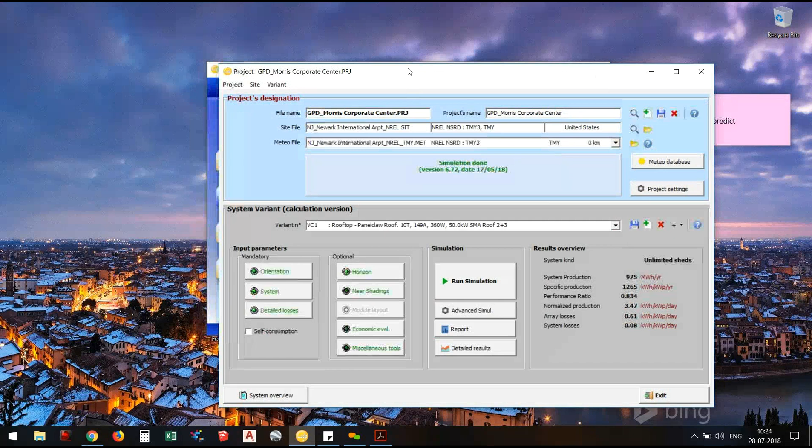So let's just go into project design. These are all the options we have, and we're going to use grid connected for now, right? Before using this window, I would like to show you the project that we are going to simulate, and a few steps that we take outside of PVsyst before coming to this window. So this is the project I'm going to use here. This is a rooftop system located in New Jersey, USA. I'm using a 360 watt module here, the tilt is 10 degrees, and you can see all of the details.

Azimuth is 186 degrees, and the pitch, the distance between each row, is 56 inches, and you have the address and everything here, right? And the interconnection is at 480 volts. So this is how a typical sales layout is going to look. We haven't started construction on this. We are still in the sales phase; we haven't sold this project. This is what we did with the satellite image we had. And you can see all other details here, module quantity, system size.

So if you look at any layout that the team has for which they want to generate a PVsyst report, these are all the details you're going to have: tilt angle, azimuth, module used, number of modules, and things like that. And then I'm using an SMA inverter here. This is the project for which we're going to generate a PVsyst report. So the very first step, as I mentioned, is choosing which meteo station, which meteo data to use, right? First, I'm going to tell you what I usually do for projects in the US.

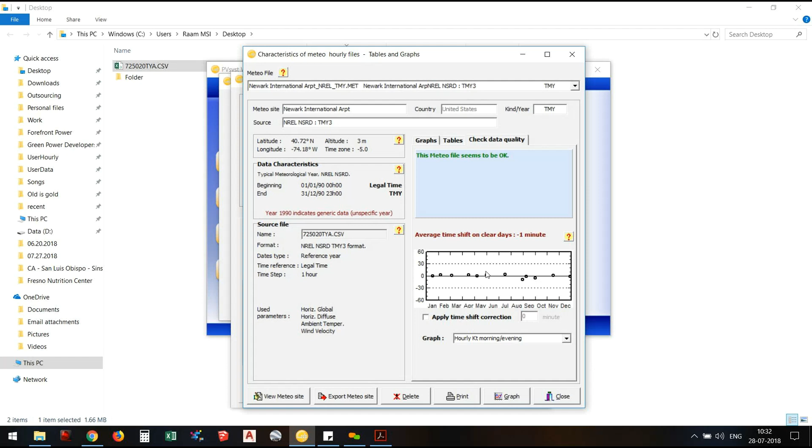So what happens is you would see a lot of spikes. Lot of days in a year where the insolation goes above 1000 watts per meter square. So it's a very bright thing. So what happens is PVsyst might consider that is not very right, and then it gives you an error saying that sunlight is abnormally high. Is that normal for the site, right? Something like that. So you could use this, but we're not going to do anything with this one now. So I'm just going to close it, and then once you have imported, I'm going to click Save Site.

You could see once I imported the file, it says meteo station met file created, right? So I've imported NREL data inside, so my meteo file is created, and then you have to associate this meteo with a site, right? We haven't done that yet. So I'm just going to click on Save Site. I'm just going to use the same name, and then I'm just going to click. It takes a while. Should happen. Okay, done now.

I'm just going to close this window, exit this window, and then come back to this window, right? So we are here, and we have a PDF which has all the details of the system, and we also imported the meteo station that we are going to use for the project. So at this page, I already have a sample project here. There are a couple of things, for example, module data and inverter data and all those things. If I'm generating a report for the same customer, I'm just going to use the same data from here and then recreate it, right? So it saves a lot of time.

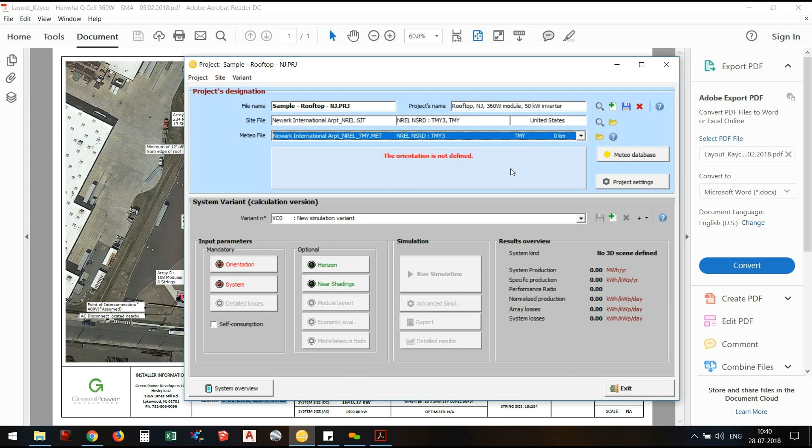Once I click on save, I get an error saying that orientation is not defined. Within PVsyst, when you see something in red, it means a problem. When you see something in orange, there is a problem, but you can ignore it. When it's in green, you're good. So we see something in red which says orientation is not defined. So what does it mean?

Orientation is how you define how your modules look, how the racking system is defined. You have a couple of different options here: fixed tilt, several orientations, seasonal tilt adjustments, unlimited sheds, unlimited sun shields. These are all for fixed systems. Then you have options for single axis trackers, and options for dual axis trackers.

So let's look at this rooftop system project. We see here that the tilt is 10.4 degrees and the azimuth is 186 degrees. It's a fixed tilt system facing south, with a tilt of 10 degrees, and this is the pitch I have. So I go into PVsyst, and you have an option here that says fixed tilted plane. So what is this fixed tilted plane?

It means that you have one row of modules. Let's say you're looking at a carport system where you have only one row of modules. Let me open a PDF to show what I mean. So this is a carport system, and I have only one row of modules here. The tilt is 7 degrees, the azimuth is 233 degrees, and there is no second row which is going to shade this.

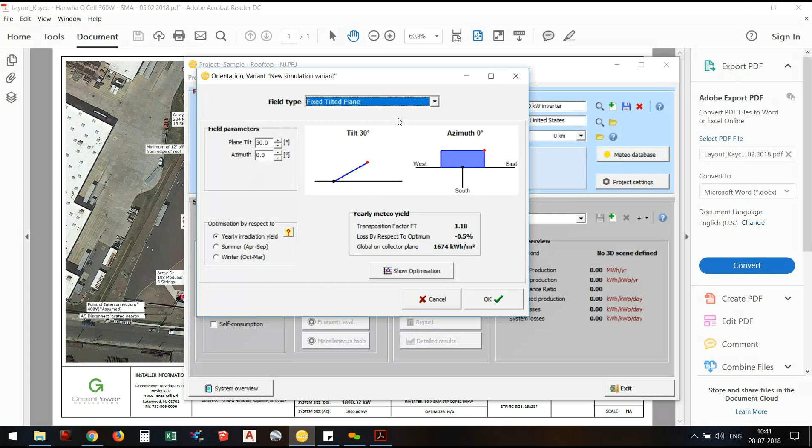When you use the fixed tilted option within PVsyst, you don't have the option to define the space between rows. So if your first row of modules is going to shade your second row, you won't be able to define that. So what I'm going to do is use the unlimited sheds option.

In this option, as in the picture here, you can see there are multiple rows, and this line shows how the sunlight is going to be. If you move this, it means that only after the sun reaches this point is this part of the module going to see any sunlight. Until then, for example, the sun is here, it hits like this, and this part of the module is going to be shaded.

So what we're going to do is we're not going to use this graphic here and then change the tilt. Instead, we're going to use the input windows here and then change the tilt. I know my tilt of the racking is 10.4, so I'm going to go and use that here, right? And then I'm going to use azimuth.

So you see when I enter 10.4, it rounded it off to 10 because PVsyst, at least for the tilt angle, it doesn't take decimal values. If it's say 10.5, it's going to be 10. If it's going to be 10.6, it's going to be 11.

So, and you would have seen some projects where they would have multiple PVsyst. One for a tilt of 10 degree, one for a tilt of 11 degree, one for a tilt of 12 degree. But at least in my experience, what I've seen is you don't see a lot of difference in generation between 10 and 11 degrees, right?

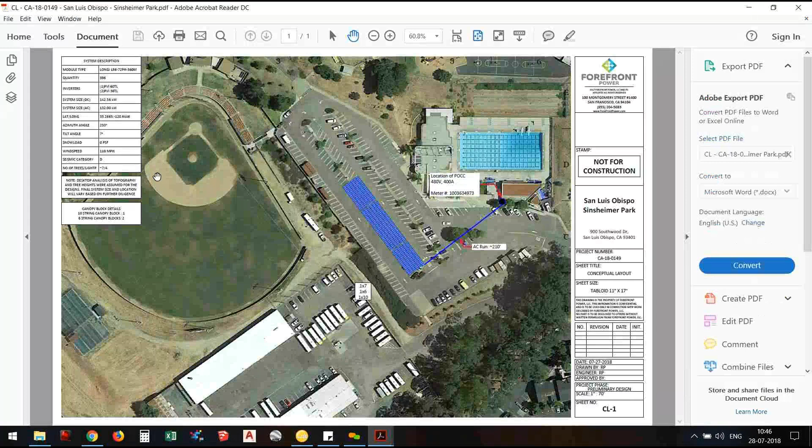And then I showed you a different project where we have a canopy system, and then the azimuth is actually 233 degree. So what happens is the azimuth for this project in PVsyst would be 53. 233 minus 180 is 53. So we enter that value.

If you have any questions regarding this as to why we do that, let's catch up in the question session and then go through it. So for now, let's just assume that you have an azimuth of 6 degree, and we're going to enter that here.

And then we have number of sheds. Number of sheds means number of rows of modules you have. When you have more than 2 rows, obviously the rows are going to get shaded, and then you're going to have some inter-row shading. But here we have more than 3 rows, and up until 100 sheds, PVsyst is going to tell you this is how the shading loss is going to vary.

For example, if you have like 50 sheds, I'm going to click on the shading graph. You can look at the show optimization graph. It says the shading loss is 0.4%, right? I'm going to bring this down to say 10, and then I'm going to click on show optimization. It doesn't change, right? I'm going to move this to 100.

It doesn't change. So let's say you have only 2 rows now, it changes, because when you have just 2 rows, the very first row doesn't see any inter-row shading. The second row is the one that is going to see inter-row shading, right? So the shading loss is actually cut into half, so you have only 0.2%.

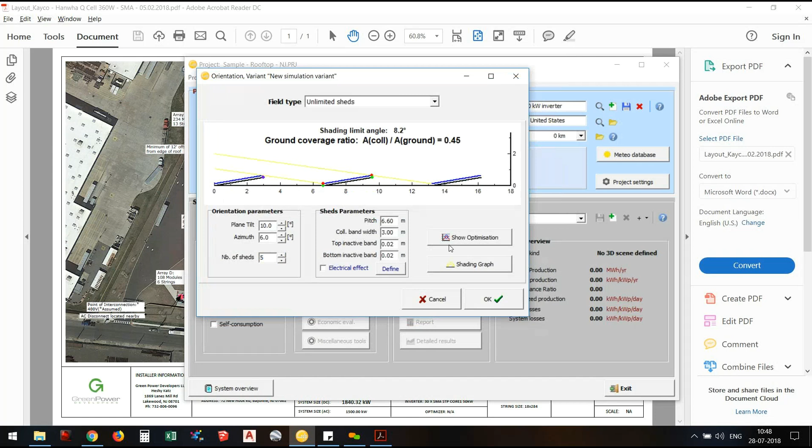Let's assume you have like 3 sheds, 0.3. I think up until 5 or 6, you're going to see 0.3, and then it just goes on to 0.4. But what I know is, it's more than 10. If you have enough time, you could just go count it. But for now, I'm just gonna enter 100.

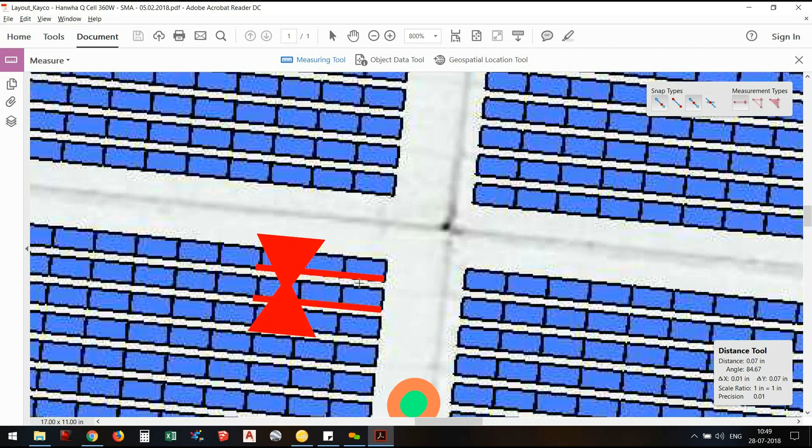Okay. And then there is something called pitch. Pitch is actually the distance from this point to this point. Let me see. Okay. So for example, this is the starting point of my module here, and this is the starting point of the second row. So the distance between these two is the pitch. The one you see between these two is actually the gap, which we don't really use in PVsyst. Some layouts mention gap, some layouts mention pitch. Just make sure that you're looking at the right number and then enter that.

So in this layout of mine, I've actually entered what the pitch is. It is 56 inches. And mostly this is defined by the racking solution you use. I've used Panel Claw as my racking solution here, and they have a fixed pitch of 56 inches. So we cannot go and change that. Whereas in a ground mount system where the very first row is not connected to the second row, you can define it whatever you want. In the field you can design with whatever pitch you have, and then just bring that number into PVsyst.

So PVsyst has all the values in meters. You cannot convert the units into inches or feet or anything like that. It will always be in meters. So I'm going to convert my pitch into meters now. So that's 56 inches, and each inch is 2.54 centimeters. So this will be my pitch in meters. It's going to be 1.42.

And then I have the collector bandwidth. Collector bandwidth is actually the length of this whole module here, right? In this system, my single module is just one, and I have placed the module in landscape. So the width is 39.25 inches or 39 inches, right? Whereas in the other system, you have 6 modules here, and each module is 77 inches long. So this would be 77 times 6, times 2.54 divided by 100. So my collector bandwidth would be 11.73 if I'm doing this project, right?

But we're looking at the rooftop project where we just have one module, and I know the width of the module is 39 inches. If you have any spec sheet of the module, just take a look at it. Most 72 cell modules would be 77 inches long and 39 inches wide. So 39 inches times 2.54 is 99 centimeters. Divided by 100 is 0.99. So I'm going to enter the collector bandwidth as 0.99.

So I do this, and then you have a value that says top inactive band. What this means is, when I say the measurement of the module is 39 inches, I'm measuring including the aluminum frame or any frame that the module has, right? Usually the modules have a frame. Unless you go for completely frameless systems like say a Canadian Solar, you're going to have some frame. It may not be 2 or 3 inches long, but you still have some. So I'm going to define these values as 0.02, and it's the same throughout. So I do both, and then I'm just going to click on OK.

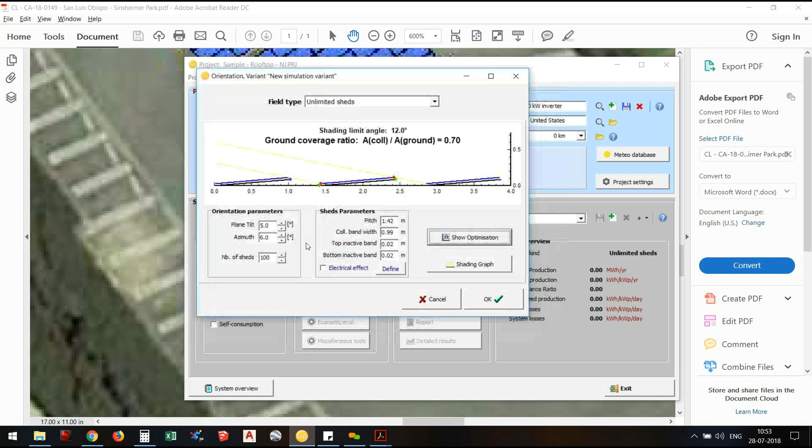And then if my tilt was, say, 5 degrees, the shading loss would be much lower. It's at 0.3%. So I'm just gonna keep it at 10 and have a shading loss of 1.2%. And then I'm gonna close.

So what we have done is we have imported the meteo station, and then we have defined how the modules are going to look: what tilt, what is the interrow spacing, and all those. And then we're gonna go to system. We're going to define the system size. We're going to choose the modules. We're going to choose the inverters. We're going to tell what is the number of modules we have in series, all the string details and everything, and then close this up.

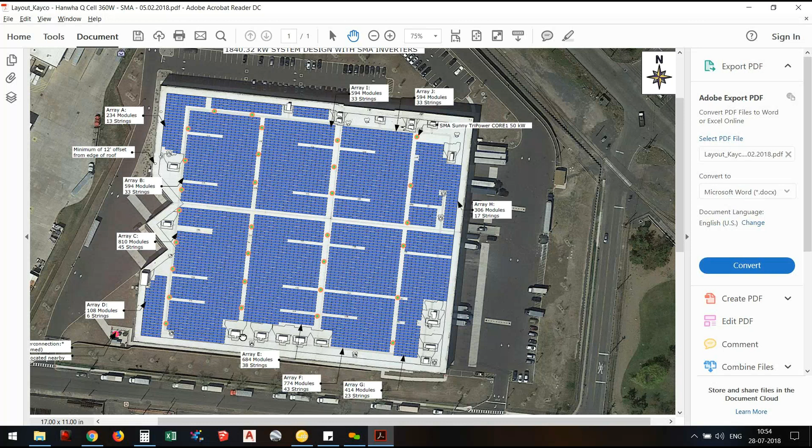So let's say you have more than one roof. Let's assume this system is actually divided into two, this part and this part. Let me just simulate this rooftop first, and then we'll take a system that's a little bit complicated. So you can name this one anything. I'm just going to say rooftop 1. For example, if you have a system where you're using 2 different modules, I would say rooftop 360 watt, and then I would define another system that says 370 watt, something like that. For now, I'm just gonna call it rooftop.

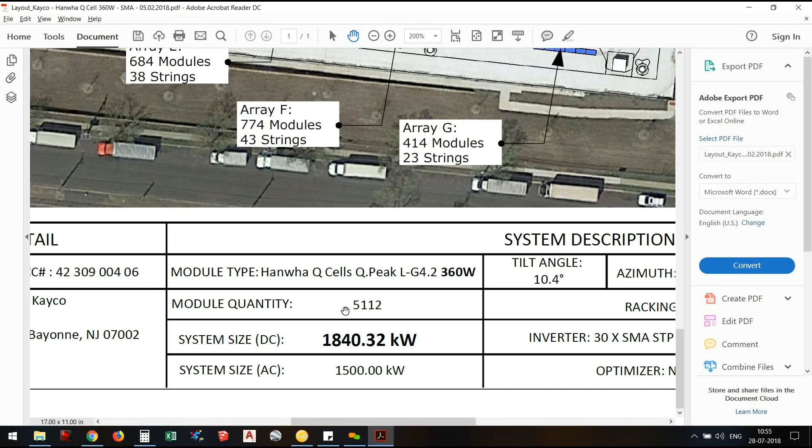And then I'm gonna enter planned power. Planned power is whatever the DC system size I see here. For me, it's 1.84 megawatt, so 1840.32. I've done that, and then this is where you choose the brand of the module. The module I have here is Hanwha 360 watt. So I just go here, use the drop down box, and then choose Hanwha.

Okay, so I have this. I'm going to choose that, and it says 5112 modules, because it takes the system size that I've entered and the module wattage that I've entered, divides it, and tells you you need approximately 5,112 modules. Let's say I enter system size as 2 megawatt. 2000 divided by 360 gives us 5556. So this is the system size. We entered that. We've chosen what module we're going to use.

There are some things that we don't want to cover in this call because we would like to get through the basics. But if you want to see the properties of the module, just click open here. It opens up all the details: short circuit current, maximum current, VOC, VMP, wattage, tolerance, type of cell, efficiency, temperature loss, size, model parameters, commercial, graphs, and everything. This is why I always suggest that you get the PAN file from the manufacturer. Once you do that, you don't have to worry about all these details.

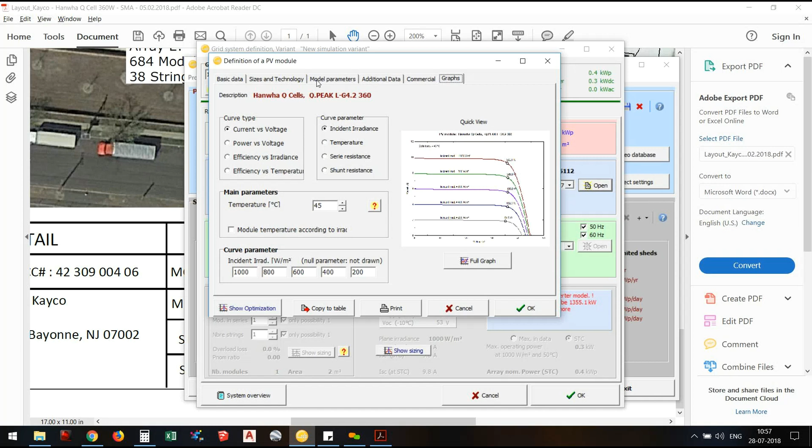If you get any of these details wrong, for example shunt resistance or series resistance, your module may not perform. You're not going to predict the module properly. So let's not do that. Let's try to get the PAN files from the manufacturer. So we have chosen the module here. Now we'll go and choose the inverter. So I'm gonna go here and then choose.

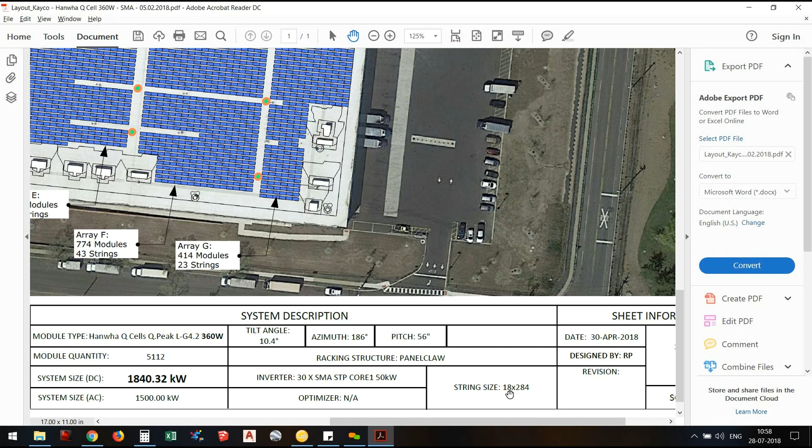So I have my inverter here, SMA 50 kilowatt, and I've chosen that. You could see the option here says use multi-MPPT feature. We're going to use the multi-MPPT feature, but not for this project. I have all my modules facing the same direction, and all my string sizes are the same. I have 18 module strings for the entire project. So it doesn't matter if my inverter has multi-MPPT or not.

Let's say, for example, there are a few conditions. Let's say I have some modules here which are going to be more lightly shaded than some modules over here. If these modules are feeding one MPPT, they might be better because they don't bring down the performance of the entire inverter.

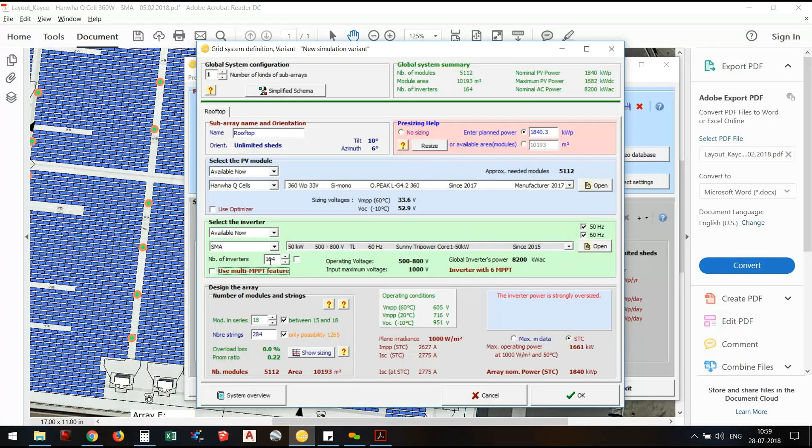But for the sake of simplicity, I'm not gonna do that now, right? So I'm just gonna uncheck this option. If you uncheck that option, you could see this value changes to number of inverters instead of number of MPPT inputs, right? So I'm gonna change this to 30 because that is what we have here. We have 30 inverters for the system, right? So I enter 30, and then it changes.

AC system size is 1.5 megawatt. DC system size is 1.84 megawatt. So once you do this section, it doesn't give me any error. So I come to this part, right? This one says modules in series, and then we have number of strings. So you could see this value varies from 15 to 18, right?

So I'm assuming you might all have done string sizing at some point, but let's look at one project. Let's do a simple math here. So as I mentioned, we are going to be using Newark International Airport for this project, right? So what I see here is, along with the other data, two different data: one is extreme low temperature, and the other one is 2% average dry bulb temperature, which is 34 degrees Celsius. So let's keep these two values in mind, and then do a little bit of math.

Okay, let me open a spreadsheet for this. So what does my minimum temperature say? It says minus 15 degrees Celsius, and then the maximum temperature is 34 degrees Celsius. And then we know that we are using a Hanwha 360 watt module. Okay, I'm gonna look at the spec sheet for now. So this is the spec sheet, right?

For example, you would have seen some systems where they say it's a 600 volt system, some would say it's a 1000 volt system, and some would say it's 1500 volt system, right? So initially all the PV module systems were 600 volt, then we moved from 600 to 1000, and now we are at 1500. So some modules are rated for 600, some for 1000, some even for 1500. And that detail should be there somewhere in the spec sheet. I'm not sure if this module is rated for 1500, so let's just assume that 1000 is the maximum we could do here.

Okay. And then I'm gonna bring in a few details from the spec sheet. So VOC for the 360 watt module is 47.71. And then VMP for the 360 watt module is 38.8, right? So this detail is from the spec sheet. This detail is from the site data. You can design a system anywhere, be it Chennai, be it in the US, be it in Japan. You always need to take these two values into account: minimum temperature and maximum temperature.

And then once you have taken these details, you're going to start looking at the temperature coefficients, right? So we are looking at VOC. The temperature coefficient is minus 0.28% per Kelvin. So this is percentage per Kelvin. Okay. So what we're going to do is find two voltages now: maximum voltage and minimum voltage. Maximum voltage is going to be based on VOC, right?

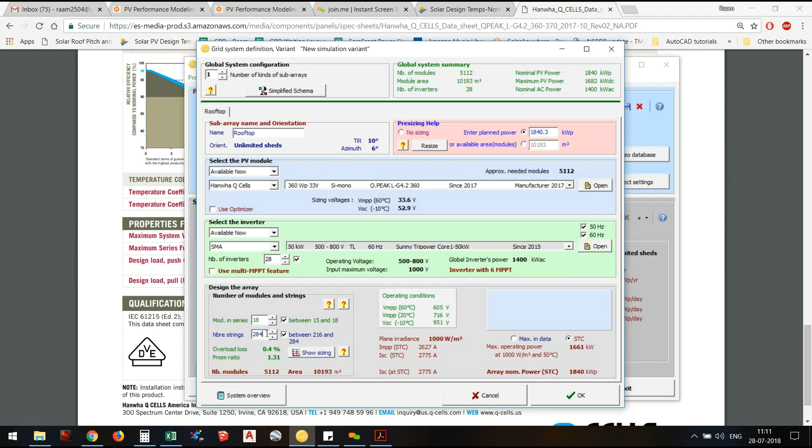360, 18, and then it says 284 because this is the number of strings that we're going to have. I'm going to go back to the design. So I have 5,112 modules, and each and every string is of 18 modules. I'm going to divide this number by 18, so it leaves me 284. So that means I have 284 strings in my system. I'm going to enter that here, 284.

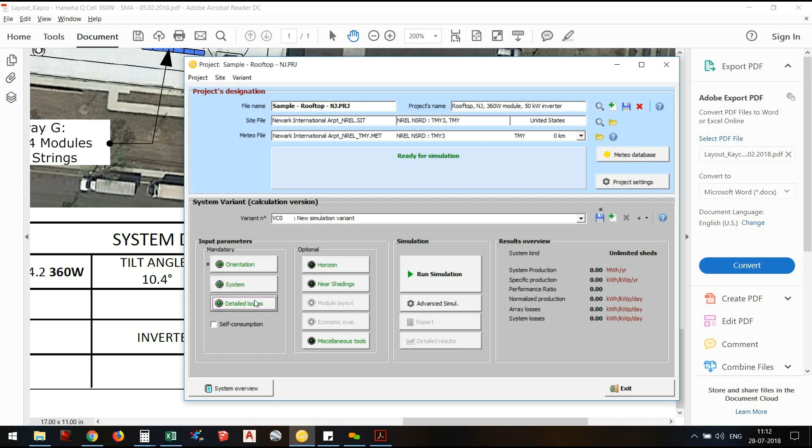So this thing is all done, right? I'm going to close this one. So we have defined orientation, where we say how the module looks like. And then in the system, we have defined the system size, module type, number of modules, then inverter type, strings, and all those details. So once we're done with that, we're just going to go to detail losses, where we define other detail losses.

This section is a bit important, but it involves a lot of input from our energy estimation team, because all the values you enter here are assumptions or studies that have been done in the field. So this is where we usually depend on companies like DNV. They come to our power plant, they take a look at every single detail: the modules that you have used, the wire length and all the voltage drop, and then they give you your ohmic loss, and that is what you use in PVsyst to generate a report.

But let's see what values we use, because we haven't built the system yet. We don't know if we are gonna win the project, but we're just doing an energy estimation report to understand how much the system generates, and we are gonna use some assumptions here. So you could see UC and UV values, right? UC is for heat loss from conduction, and UV is heat loss from convection.

So conduction is when you have something in contact. Let's say you have a pressure cooker at home. It's hot, so when you touch it, you feel the heat. You're in an AC room, you're feeling cold. You're not physically in contact with the air conditioner, but you're still feeling cold because the air around you is cold, and you're feeling the cold wind. That is convection.

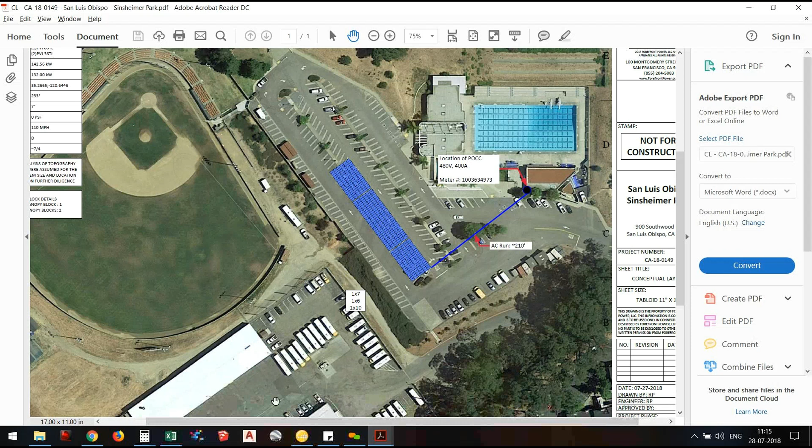Whereas in a rooftop system, we don't have that luxury, right? The tilt is just 10 degrees and the clearance is just 12 inches. So there is not enough area for the wind to move through the modules and take away all the heat. So in turn, you start losing a lot of energy due to temperature. So this one, the value you see is 20 and 0.

I haven't done the whole math, but the value I get from my design team is to use something like 20 and 1.2. So what this means is 20 is the factor by which I lose the heat through the material that is connected to the module. For example, I have an aluminum frame connected to the module that takes away a little bit of heat from the module. I might have, say, a fiber frame connected to it that might take a little bit of heat from the module. So it really depends on what type of frame you use and what study the design team has done before, right?

So I'm going to give 20. And then this value is 1.2, wind loss. So there is going to be a little bit of wind movement beneath the module, but it is not super high like you see in a ground mount or a carport system. So I'm just going to keep this at 1.2.

You would have seen some projects in residential scale. In residential projects, we don't have any gap between the modules. It is going to be flush onto the roof. So in those projects, you don't have any space for the air to move, so it doesn't take away any heat from the module. So in those cases, this loss factor might go down. It might be like 1.0, sometimes even 0.5.

Okay. So this value, it's an assumption. This value has to come from the design team, or at least people need to sit together and understand, okay, this is what we do, and this is how the whole process is done. So these are all the factors that usually independent engineers like DNV and Leidos define. They have people who sit in the field. They have different measuring methodologies. They might have more than 4 thermocouples on each and every module. They take data from that, study the data for the whole year, and then give us just 2 different values that we could use in our energy estimation.

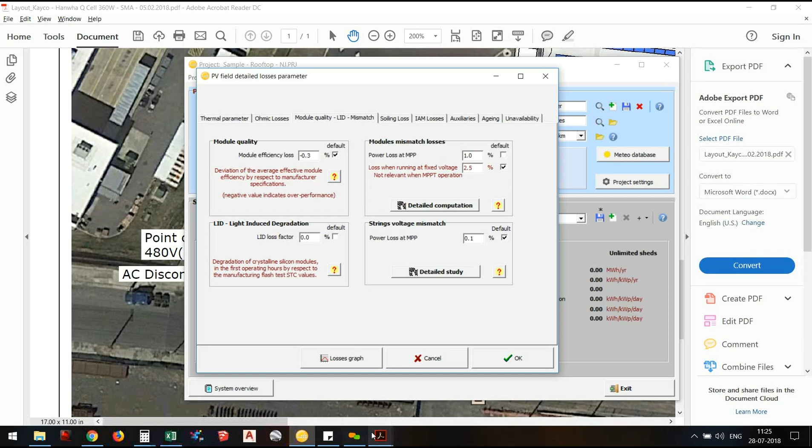So let's assume we're gonna use a transformer for this project. I'm gonna leave this one on, and then I'm gonna close this and go to the next tab, which is module quality data. Module quality, this is module efficiency loss. So what this means is, let's look at the spec sheet of the module. So what do they say here? You have all these data like power, 360 watt, 365, 370, and all those.

And then you have a detail which says power tolerance. So power tolerance is 5 watts to 0 watts. What this means is, even though the modules are all rated for 360 watt, not all of the modules are 360 watt. Some might be a 361, some might be a 358, some might be a 365. So, for recent times, you could see the number here. It says power tolerance is 5 watts to 0 watts.

But if you look at spec sheets from say 2001, 2002, you will see two different numbers here. You will see 5 watt and you will see 3 watt here. So what that means is, when you're buying a 100 watt module, it could be anywhere from 97 watt to 105 watts. And people were taking advantage of that. Instead of giving you a 100 watt module, since it's already stated that it could be anywhere between 97 to 105, they were sending all modules at like 97, 98, 99, but not 100, right?

So what happens is, you have a system based on the STC value. Let's say you have 10 modules and you have designed it saying that it's all 100 watt modules, so it should be a 1000 watt system, right? But all the modules we received were at 97 watt, right? And so the final system you have is not a 1000 watt system, but a 970 watt system. So obviously your system is going to generate much less than what you thought it would generate, right?

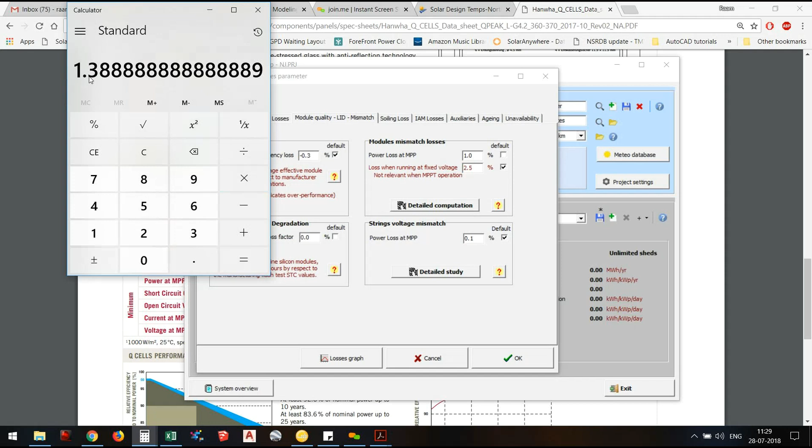So what does this mean? It means that you have a gain of 1.3%, right? So if you have something like that, I'm going to enter minus 1.38, because this one says module efficiency loss, but it is not actually loss, it is a gain, right? So I'm going to enter a negative, minus 1.3. But in reality, it is not the case, right?

We won't have all of the modules at 365 watts. Let's assume we're going to receive only 50% of the modules at 365 and the rest is all going to be at 360. So it's going to be like 0.7. I'm going to go and change this to 0.7. Okay. So this is an assumption.

But when you're going to go and install the system, you have received all of the modules from the manufacturer. You have the flash data, you have the module wattage data, so you know what the module wattage is. Let's say, for example, we have ordered 10 modules and values range from 361, 362, 360.

365. Okay, so what is my sum here? Right, so 361.4 is the average, and my spec sheet says 360, so I'm just going to divide it by 360, right? So 0.38%. So this is what I'm going to use here, minus 0.38, right? So this is how they do.

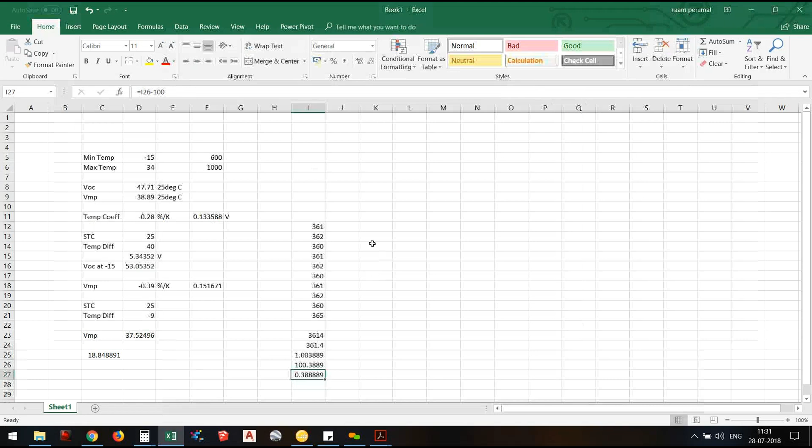But if you have like 10 modules, you can do this. But when you're going to order thousands and thousands of modules, we won't be able to do this. It has to be someone who does this for us and just gives us the flash data. So it's minus 0.3. And then LID loss. You would have come across this factor.

It's light induced degradation. So what happens is, the modules are manufactured. They are sent to the field. When they're exposed to light for the very first time, there is a little bit of degradation in the performance that you cannot claim back. It'll stay like that to the end.

For example, when you order a 400 watt module, you have like 1% LID loss. So what happens is it actually loses 4 watts on the field. So it would always stay as a 396 watt module. It doesn't stay as 400. So that loss, whatever you have in the spec sheet or whatever the manufacturer tells you, you enter that data here. So I'm just going to click on default.

But usually what happens is you talk to the manufacturer and try to get the values. The manufacturer gives you something like minus 1% or 2%, something like that. So I'm just going to click on default for now. But that detail has to come from the manufacturer.

These days we have a lot of manufacturers who try to make changes in the manufacturing process so that they don't really have any light induced degradation. There were a few companies which recently came out and said that they have LID proof modules, the modules that don't have any LID losses.

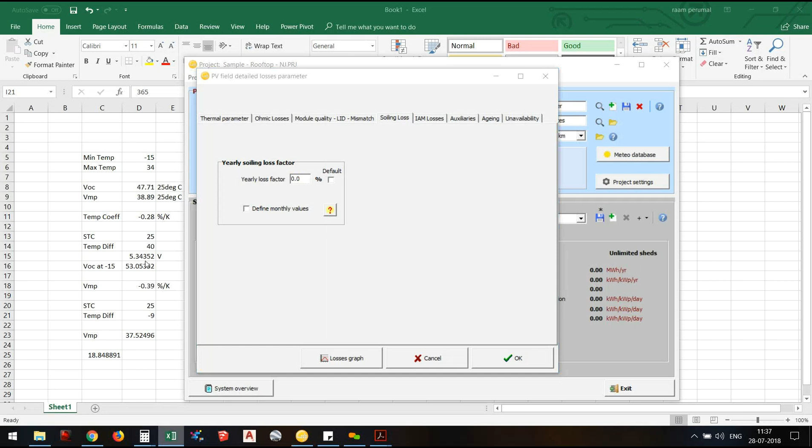I'm not sure if you had a similar one for the sites in India, but at least in the US, we worked with the independent engineers, and then we got a tool. So what I'm going to do is I'm going to enter the address. So I'm going to enter Newark, New Jersey. Right. I do that. It fixes the lat long elevation, and then I'm going to click on find closest station.

So I've done this. So what I'm going to do is I'm going to change the details here that say rooftop, and then set the detail 186 azimuth, and then I go to the next tier and click on run snow loss. Okay. So I get a value for the whole year, which is 8.6%, 9.1%, 4.8%. So it goes like this.

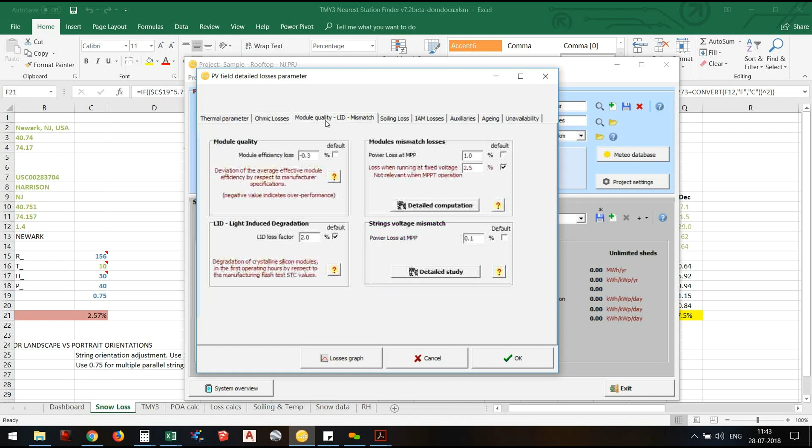So we have defined thermal parameter, ohmic losses, LID, mismatch losses, soiling losses, IAM. So I'm just gonna click on OK, and I'm not gonna talk about the horizon, near shading, or miscellaneous tools for now. I'm gonna go to run simulation. So we have defined the orientation, the system sizes, modules and things. We have said what are all the losses.

So now I'm gonna click on advanced simulation, right? I'm gonna go here and enter the details, simulation 1 or whatever it is. Let's say you're gonna look into multiple variants. At first you check with SMA inverters, second with, say, another inverter, third with a different central inverter. You use this tab here to enter those details so that you know what you're looking at. Sim 1, let's say SMA, and then I'm going to click on simulation.

So once I'm done with the simulation, this is the graph I have, and then you have an option here which says report. I'm going to click on report, so you get this final PDF report that we usually see as a PVsyst report, right? You can see it says version, date, grid connected system, and then rooftop, New Jersey, 360 watt. So whatever definition I gave at the top, I said that's a 360 watt module system.

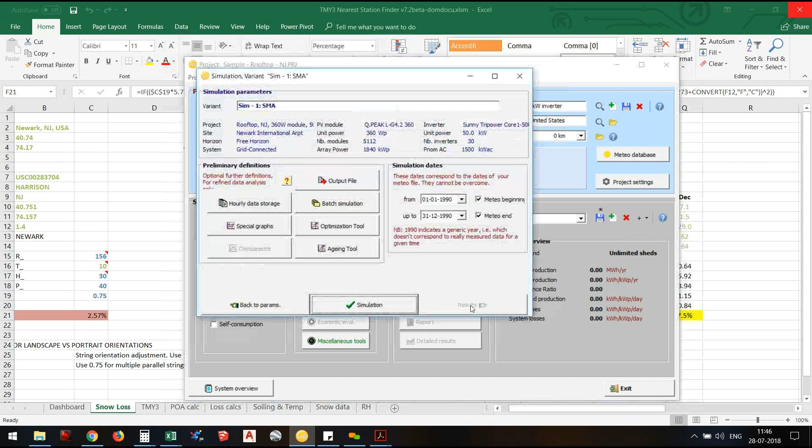And then same with inverter. Why am I seeing 28 units here? Because I think I didn't do a good job when defining the inverters. It should have been 30, but I'm seeing 28 here. So actually I've missed entering 2. So what I'm going to do is I'm just going to close this one, click on this back button, go to system, and then go and change the number of inverters. Okay. So I've done that. I'm going to click OK, and then come to advanced simulation and click on simulation again.

So in the first page, you wouldn't see it. The first page is just to make sure that the report has all of the values that you entered. So same with page 2 as well. And then the third page is where you start seeing the simulation values, right? So you have all these details here, and then you have a number that says produced energy. So this produced energy means how much energy you generated in this year, and then you have the specific yield, which is like 1246 kilowatt hours per kilowatt peak, and then you have the performance ratio.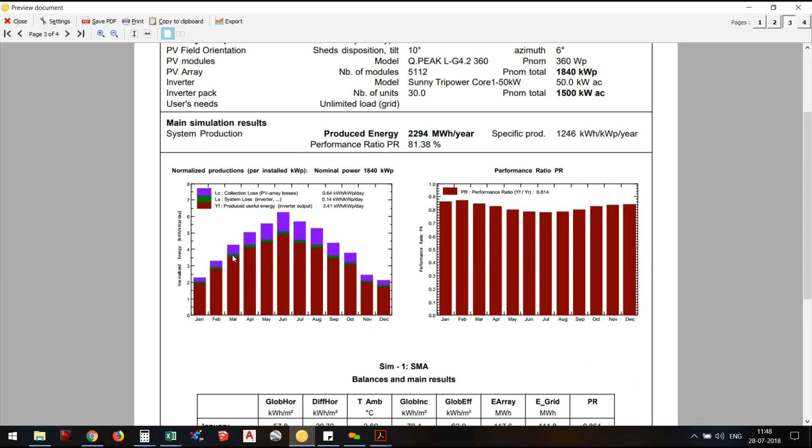And then you have this graph, which is very common. You guys would have seen it. Right? So you have this graph which says Yf, this is the produced energy, these are all the losses, and these are all the system losses. And then you have a table which has GHI, DHI, ambient temperature, global incident, global effective, and E array. So E array is the energy that you produce in the PV module, right? Whatever energy is generated on the module side. And then E grid is something that is fed to the grid. So you see a difference between this value and this value, right? That's the loss you actually have in the AC side of the system. And we'll get to the next page where we have this graph and I'll explain what everything here is.

So this 1422 kilowatt hours per meter square, this is what the insolation data is. So if you're looking at a site somewhere in India, this one would be around like 2000, 2200 because we have a lot of sunlight. And this is horizontal global irradiation, and this is global incident on the collector plane. So this means the energy that you actually collect on the PV surface, right? We have kept it at a tilt of 10 degrees, right? So what happens is when you keep something flat on the floor, facing exactly at the sky, it doesn't collect any of the scattered beams.

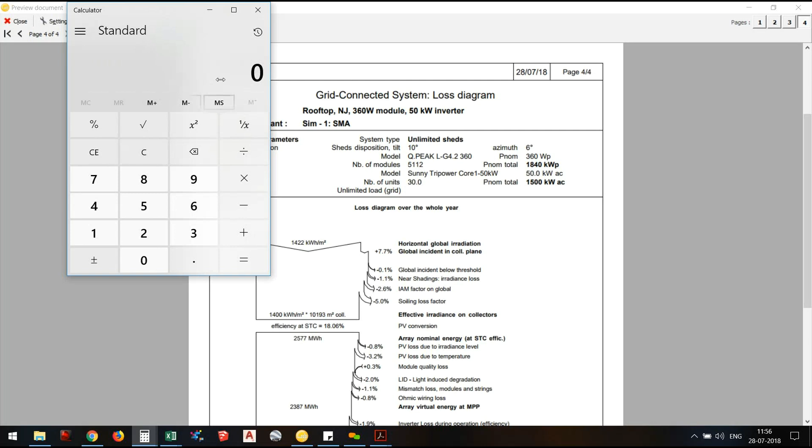I think this module has a different spec than what we have. So let's assume, I think it's 1.99. Okay, so this is the module area, right?

So what this means is, 10193 square meters is actually the collector area. Collector area means the area of each and every module times the total module count. So you have this, and then we know that the efficiency of the module is 18.06%. This efficiency comes from the PAN file.

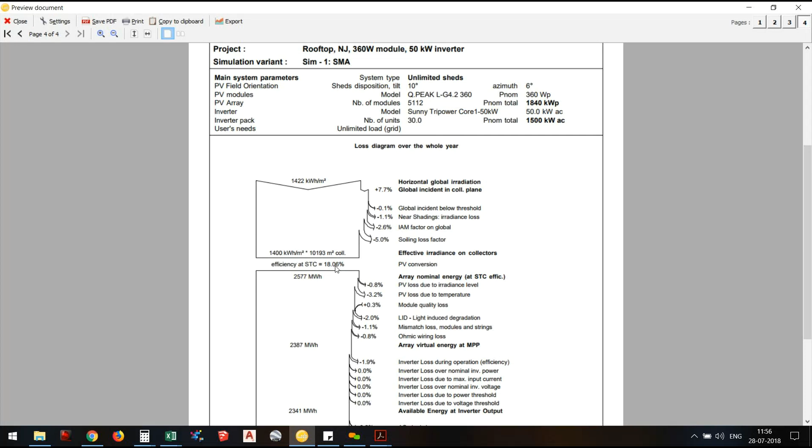If you have a spreadsheet, something like this, you can go and see the efficiency. It says 18.1, 18.3, 18.6. So we are using a 360 watt module, and the efficiency is 18.1, and that is what we see here. Right? So we have this value. Let me show you the calculation.

So we have 1400 kilowatt hours per square meter. The overall area is 10193, right? So this is the energy we have as sunlight, all the energy we have from the sun striking on the modules. But we know that the module's efficiency is only 18.06%. It has the capacity to convert only 18.06% of sunlight into electrical energy.

So you would divide this by 100, and then 2577 kilowatt hours. This is in megawatt hours, so you divide this by 1000. Right. You have 2577.19, and that's the number you see. So till here, it's all sunlight. We are doing all these losses in the sunlight spectrum. And here is where the energy is converted from light energy to electric energy, and this is where you have this one, 2577.

So all these losses you see here will be in the electric spectrum: irradiance loss, temperature loss, quality, and everything. So what does this one mean? PV loss due to irradiance level. As I mentioned, your module's efficiency is 18.06% only when the sunlight is 1000 watts per square meter of irradiance. When the incoming sunlight is not at 1000 watts per square meter, let's say at 800 or 600 watts per square meter, obviously you're going to have some loss, and this loss accounted over the year is 0.8%.

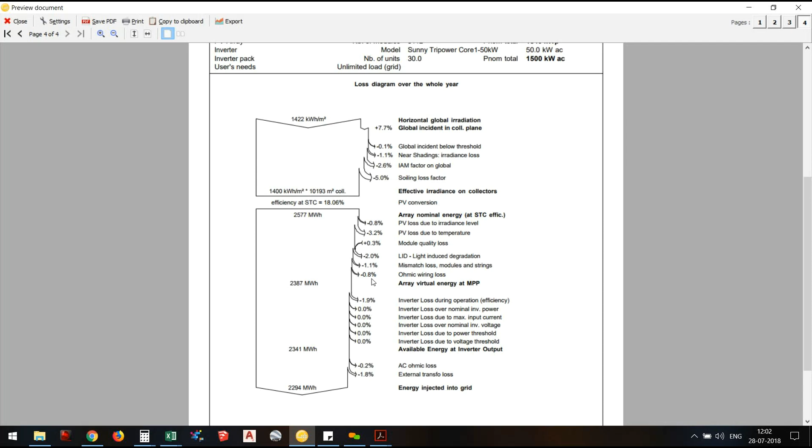1.5. That's because 1.5 is the maximum. But throughout the year, you're not going to see 1.5. There are some days where there is not going to be much voltage current traveling in the wire. So only when the wire reaches its maximum capacity, you're going to see some loss. If it doesn't do that, then we don't see any loss. Then it will be zero. So throughout the year, PVsyst averages the ohmic losses, and this is what the final loss will have.

And then you see inverter loss during operation, which is 1.9%. This is the loss. This is the efficiency of the inverter. The one that we used is 98% efficient, so we are seeing 1.9% loss here. But if you are using a central inverter that has the efficiency of say 95%, you would see a 5% loss. And then same with AC ohmic losses. So this is DC wiring loss and this is AC wiring loss. So we define 0.5%, but throughout the year the average is going to be much less, and that's what is 0.2%.

And then we have a transformer in the system. Obviously, the transformer has to convert the voltage from say 480 volt to 12.47 or 11 kV, 4.67 kV, whatever the case is. So obviously during that conversion, we are going to lose some energy because it's not 100% efficient, and that's why we see a 1.8% loss here. So you could see that we started at 2577 megawatt hours. We lost all this energy, and then we end up at 2294 megawatt hours. So this is the loss graph that we see in every single PVsyst report. And this number is what you see in this page, 2294 megawatt hours, and this is the specific production.

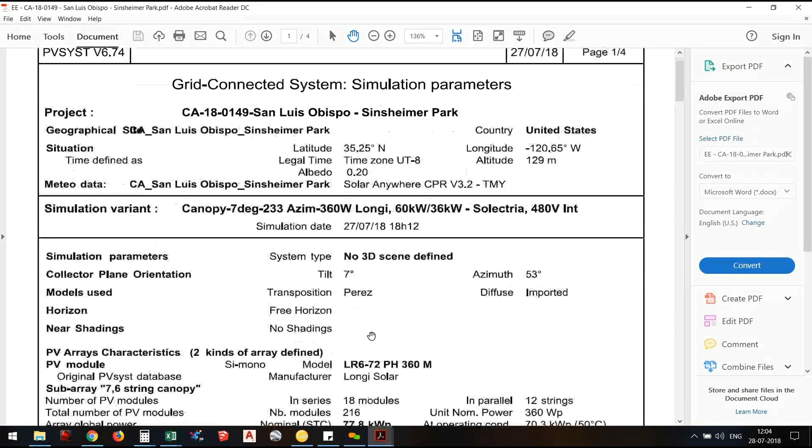So Ram, in a few of the PVsyst reports, there is a graph in yellow color. Yeah. Do you have a sample, or let me bring you one? Give me 1 second. I do not have one. I want to understand how to read it. I should have one. Yeah, give me 1 second. I think that is module layout. Ram, I think he's talking about the sun directions. Okay. Give me 1 second. Let's go back. Is this the one? Yeah.

Yes. Okay. So what this means is horizon. Let's assume you have a PV system that is right next to a mountain. You have a mountain range. It doesn't have to be right next to it. It could be even 100 kilometers away. But what happens is, unless and until the sun comes above this, your module is not going to see any sunlight, right? It's only going to get scattered rays. It's not going to give you a direct beam. Let me draw one.

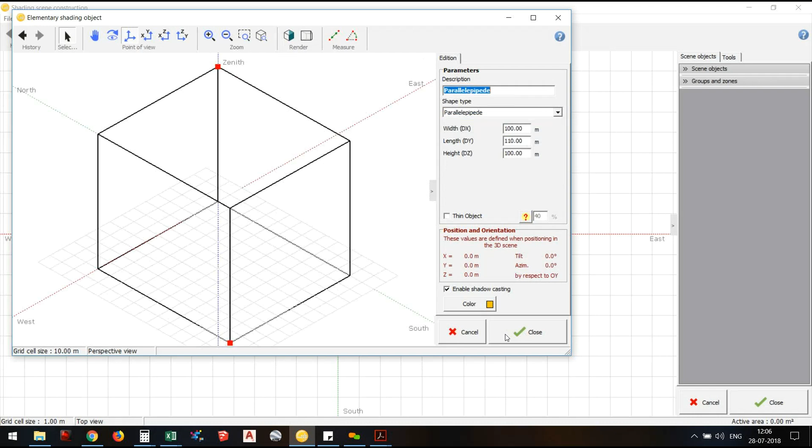Hold on 1 second. Okay. Let me show you this. So what we're going to do is draw. You're going to generate a shading object. In PVsyst, you cannot go and draw a mountain or anything. So I'm just going to draw a regular parallelepiped, something like that. You make a structure. I mean to say the pole. Yeah, something like that. Okay. So let's assume this would be a mountain, and then we're gonna place modules here.

Okay. So I have a module here, right? Sayan, are you able to see the screen now? Yes. Okay. So let's assume this is the situation that we're talking about. We have a mountain range here. We have a PV module here. So the sun goes from east to west, right? So during the morning hours, until noon, the mountain is actually to the other side of the module, right? And here it is all clear. There is nothing blocking the module's view from the sun.

So you won't have any shading loss. But what happens is when you get here, the mountain is here, the module is here. If the sun is very high in the sky, you would not have any problem. But during the evening hours when the sun comes down, it will usually be very low. So direct sunlight would not hit the modules. It will always be scattered beams.

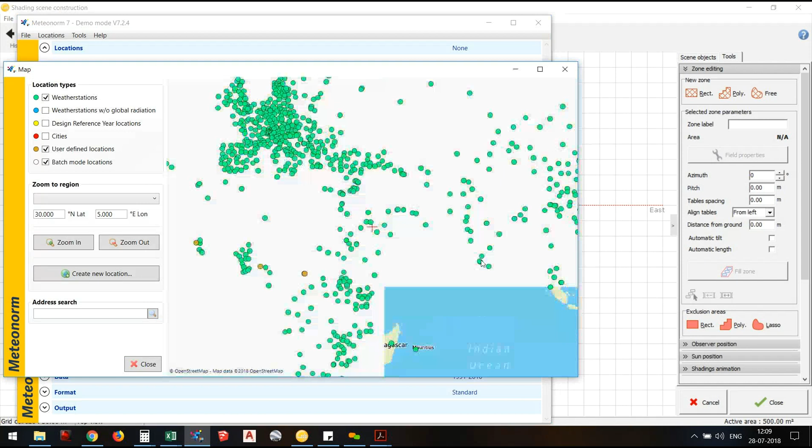So this is the tool. This is Meteonorm. Okay. In Meteonorm, you can use this particular tool for free. You can download the horizon for free. So I'm just going to click on this option, which gives me a map. I'm gonna go to Chennai. I'm gonna go here. I'm gonna click on this. It says Madras weather station, everything.

So what I'm gonna do is choose something like this. Let me see if we get a bit more granularity. I'm not sure. I'm just gonna put. Okay. So we are here, right?

So once I've located the site, I'm just gonna click on create new location. I do this, and then I save the name as Tambaram Chennai. Then I close this, come here, and load this site. Okay. So do you see this one? If we want, I'll go back and tell what we did within Meteonorm to get this one. But let's just look at this one.

Hold on 1 second. Okay. Can you guys hear me now? Yes. Okay. My earphone came off. So yeah.

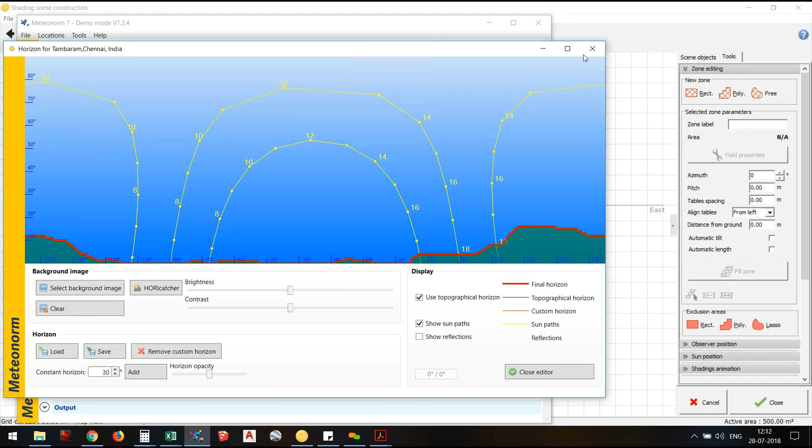I close this one. We close this one too. And then you see an option here which says horizon. I'm going to click on this, and click on read import data. Before importing the data, I'll show you what this means. You see a pendulum-type graph here. This is the path of the sun.

We might have seen some online pictures where a person takes a picture of the sun from the same spot throughout the year. You would see that it actually makes an 8 shape. It is what you see here. So this 8-type structure you see is the time of the year. And this inverted bell-shaped line which you see here actually corresponds to each and every month.

So what this means is the innermost one. This month is actually, I think it's March or June. Let me get you a better data. So this one corresponds to 1 month. This line corresponds to 1 month. This line corresponds to 1 month. Okay. So this is the default graph we have, and this is called azimuth and sun height. So it moves from 0 to 90 degrees as you see.

So what this means is, usually during sunset, sun goes down, right? It's 0 degree. At sunrise, it's at 0 degree. So during the day, sun rises up. It goes from east to west, that is azimuth angle, and then it goes from 0 degree to 90 degree, which is altitude angle. So the location of sun during any point of the day. Let me show you another graph which makes it very clear. This one. The image was the best one.

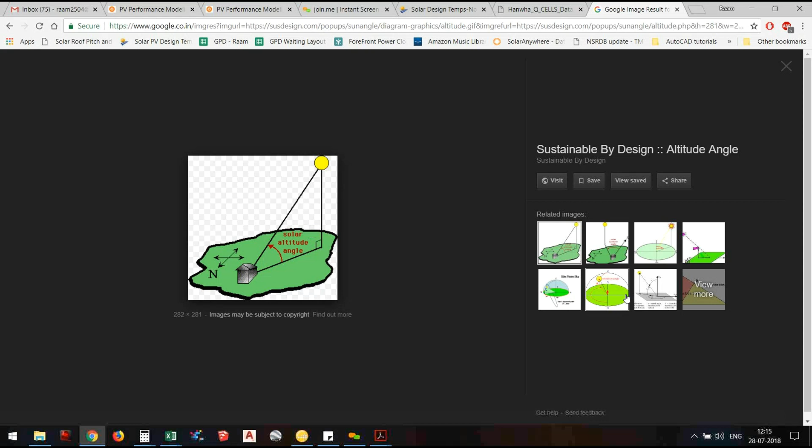And then there is another factor called the azimuth angle. So what this means is, if you're looking perfectly south from your house during the morning hours, sun is going to be at your left hand side, right? So if you want to see the sun, you have to turn completely left. Let's say you go out again and want to look at the sun at 10 o'clock. You don't have to look all the way. You have to just maybe turn 20 or 30 degrees from perfect south. So that angle the sun makes is called azimuth angle.

So if you want to define, because this is three-dimensional, right? Sun moves in a three-dimensional space. So if you want to define the location of the sun, you have to define it in two ways: what angle it makes with south and how high it is in the sky. How high it is in the sky is defined by altitude angle, and what angle it makes with south is defined by azimuth angle. So in PVsyst, this is defined for a site.

What we're going to do is bring the data that we downloaded from Meteonorm. When you click on this, it gives you different options: PVsyst internal file, Carnaval file, Solmetric Suneye, Horiz'on software, and Meteonorm software. Meteonorm software is what we use at the moment. I'm just going to click on that to bring this value in. Okay. So you see the value now. This one doesn't have a lot of value, so I'm just going to adjust this one. I'm going to pull it like this.

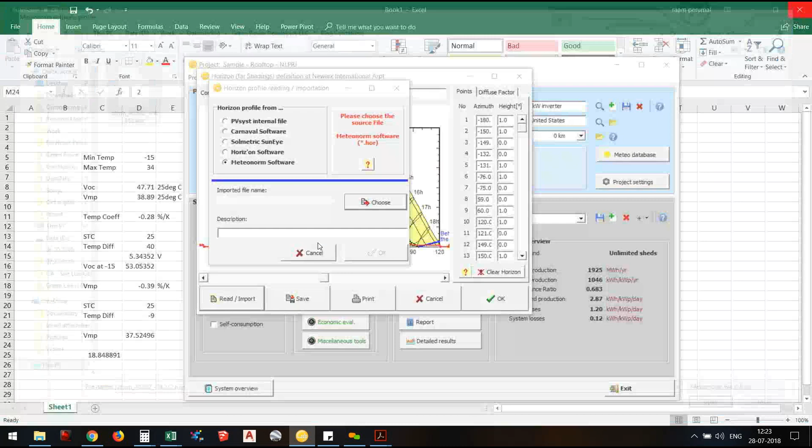Look, this one. You see it's flat throughout the day. But during the evening, after 7 o'clock, there's a little bit of shading, and before 6 o'clock in the morning, there is a little bit of shading from the surrounding regions. It's fine. Okay, this one is completely flat. We're not seeing anything at all. So let's try Ooty. Let's try some hilly region. Do you have any place in mind where you saw a lot of shading from horizon?

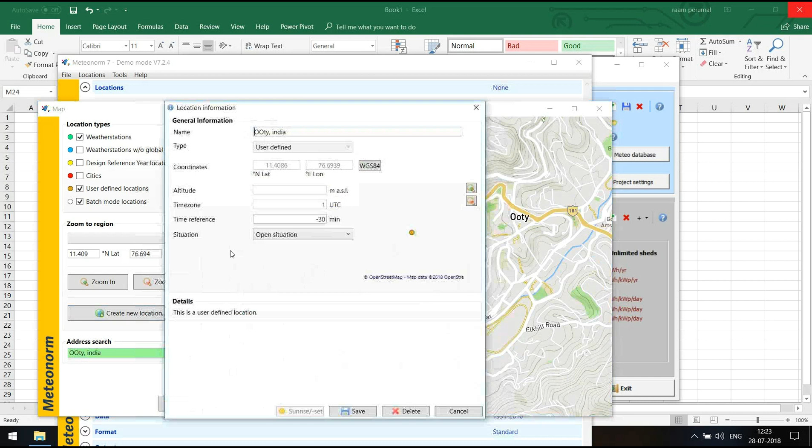Not exactly. I tried to understand this graph, but I could not. Okay. So now it makes a lot of sense how it works. Yeah. So let's try some hilly region and see what really happens there. Okay, you see, it is this bag, right? It has a little bit of shading in here. Because we are already at the top of Ooty, we're not seeing a lot of shade. Maybe you can take Coimbatore. Yeah, it's close by, right?

Okay, so this is where the hilly region is. We are right here. I'm just gonna move this one somewhere like this. So I'm keeping it... hold on 1 second. No.

Sorry about that. So we are seeing a site. So what I've done is I kept it closer here. Okay, so we have a mountain region to the west of it. Right? This is south, this is east. Let's see what happens. Or I might push it here. Okay, so it's right next to it. I'm just going to create this region as sample mountain and close this.

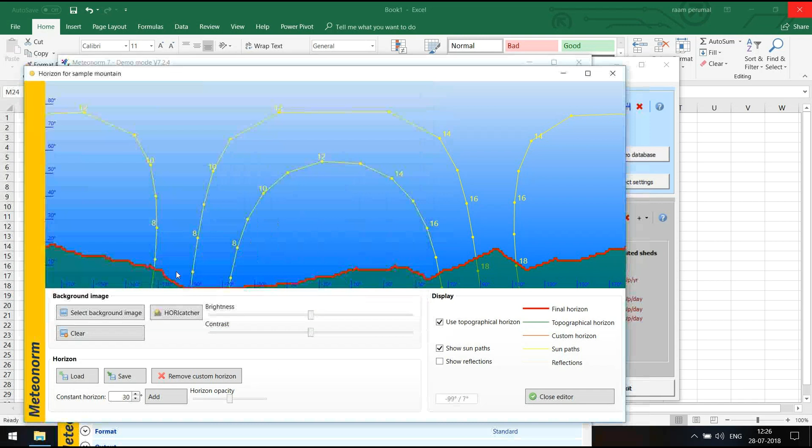You see, it has changed completely because we are right next to it. I'm just going to save this one and close it. I'm going to import this data here. Right. You see, it has completely changed the whole system. So from 5:30, it doesn't matter which month of the year, it's always shaded.

But in the morning hours, it's a bit better because you saw that the mountain regions are located to the west of the site, not in the east. So what happens is east is fine. East is morning hours, right? So it's fine. But in the evening hours it's bad. But let's assume we are in the northern hemisphere, right? If we were in the southern hemisphere, it would still be the same. It doesn't change much. But there might be some location where you have an enclosed mountain right below you. In those cases, you might see shading loss throughout the day, even during here.

And then I just run the simulation. Right. So you see, here we have all the shading losses. Here we don't, even though it's being shaded here, it doesn't matter because it's all behind the plane. It's like when the sun comes to 12 o'clock, the sun has already risen here. The sun also goes up high in the sky, right? So we are okay here.

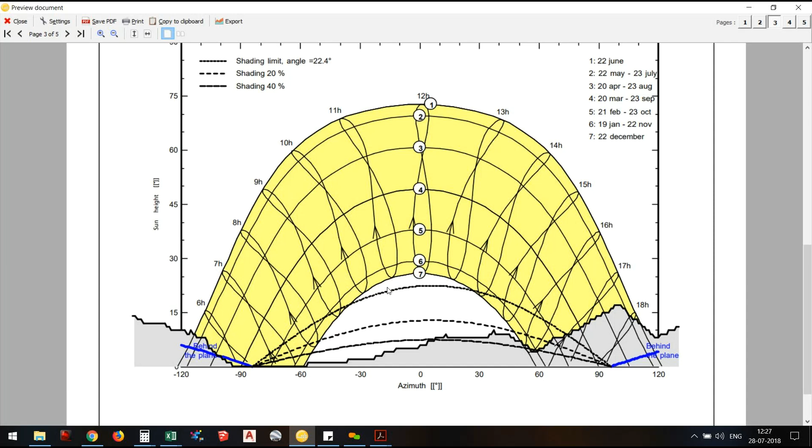But let's assume the sun doesn't rise at all. Let's look at countries like Norway, where the sun doesn't go high in the sky, it just stays at one level and rotates throughout the day. In those cases, the sun might go something like this. Even this region might be a bit flat. Ours is all a perfect bell like this. Can you pull up Norway? Yeah, let's just take a look for understanding. Hold on one second. I'm going to change the site from Newark to something in Scandinavia.

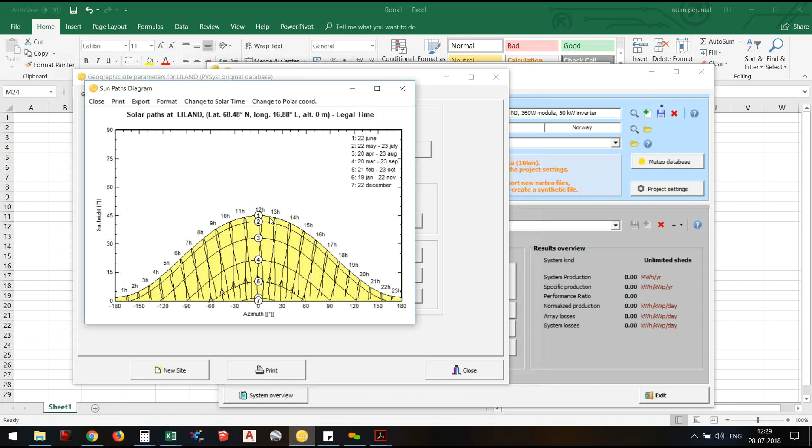You see, this is the path I have pulled in. This is the graph we would be seeing in the final phase. You saw how our graph went up to 90 or 75 degrees, like a huge bell graph, and then here you saw the gap, right? But in this one, you're not seeing that because the sun doesn't even rise above 45 degrees. So when we go out at noon, like 12 o'clock, we'd have to look straight, perpendicular to the sky, to look at the sun. There it is 45 degrees. And you see it doesn't go to zero at all.

You see, in the end, it's always at a certain degree. So it means that even during the night, you would be able to see a little bit of sun. That's why this graph is like this. I'm trying to bring this one in. Let me pull in some good site. I'm not finding any meteo station nearby. So what I'm doing is I just go to download meteo sites.

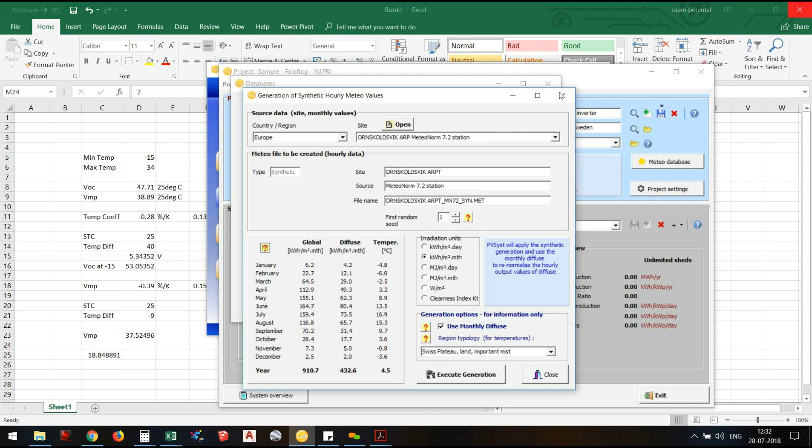So what this means is, for this one, we have a site. But as I mentioned, for any site, we need to have a file associated with it. So what PVsyst does is it just has a file name. It hasn't executed it. It is not in a format that we could use. So we go into this section, databases, and then you see something called synthetic hourly data generation. You click on this, and this is the station we were trying to use.

Then you see something at the bottom that says execute generation. You just click on that, and then a meteo file is created for this site. So then I close this. Now if I come here, I'll be able to use that file. You want to remember the name?

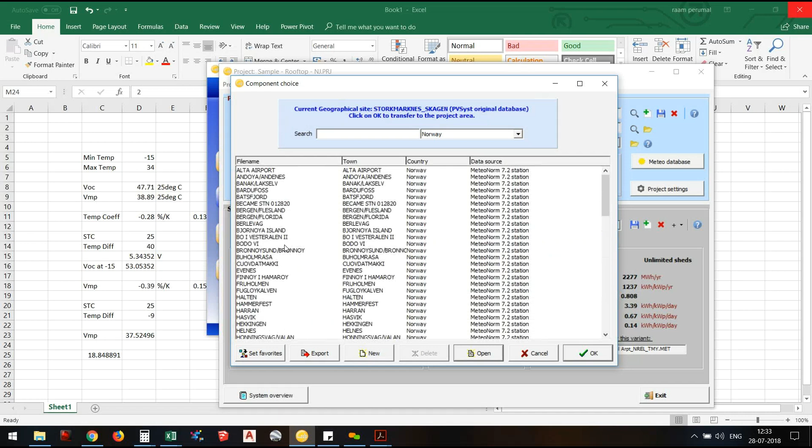Raam, I think I get the point. So this is clear. Okay, cool. So what was the next question you had? Anything else that is not clear?

Another request is the Excel sheet that you have created. I think you can share that as well after the meeting. Yeah, that would be helpful. So what I'll do is I'll put this in a better format, because this one doesn't have any explanation in there. Let me put this together in a way that we could just understand as we're looking at it. It has all the values scattered throughout. So I'll put this in a better format and then I'll share it with you.

Okay. Next question is, when we were inserting the azimuth degree in PVsyst initially, can we take it as a thumb rule that for any site in the northern hemisphere, we just subtract 180, and whatever number comes in, we just put it? Exactly. For the southern hemisphere, will it be exactly the number as it is?

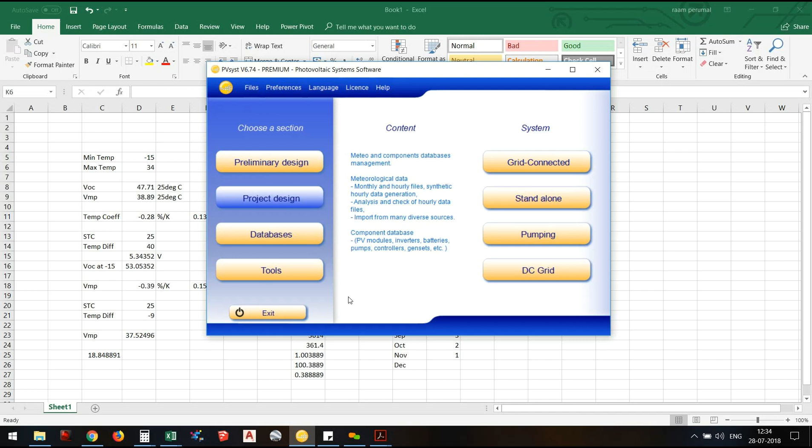It still changes. So let's assume this is north, south, east, west, right? If you look at any architectural drawing or any site plan, usually north is 0, east is 90, south is 180, and west is 270, and again it's 360 or 0 at north. But PVsyst says, if you're in the northern hemisphere, south is perfect 0. I'll show you this.

Okay, so this value in yellow is what we see in the real world. Now PVsyst says south is 0. So if you are going to the east, it is negative, so 90 degrees would be minus 90. If you are going to the west, it will be positive, so this will be 90. 270 is 90 degrees from 180, right? So it's 90. And then when you go here, it's a total of 180.

So you won't even be able to define that. It's completely opposite; you're not going to see any sunlight at all. So you won't be defining that. Right. So this is what we see. This is for the southern hemisphere, and this is for the northern hemisphere.

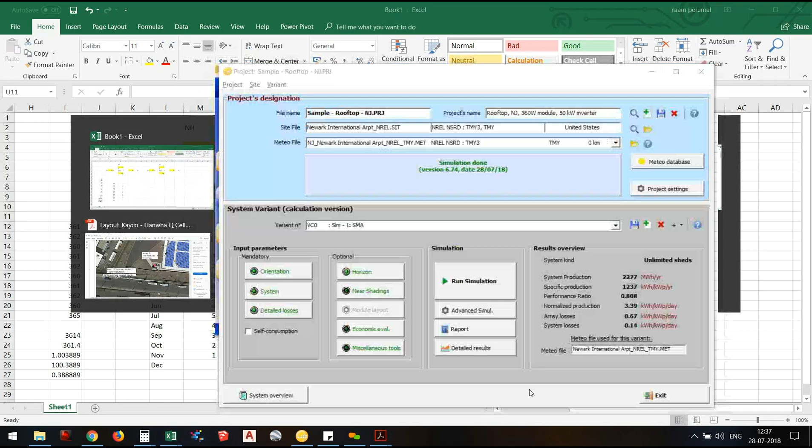Do you remember any site in the southern hemisphere? Never dealt with any. Yeah, exactly. Give me one second. Let's make sure we are choosing a site in the southern hemisphere. Okay, let's look at Cape Town. Right?

So let's go to this one because it gives you better clarity. You see, they have moved this thing. This one is north, and west is on the opposite side, east is on the opposite side. So they're saying this system is facing perfect north, and let's assume we have a system that is facing north and a little bit northeast.

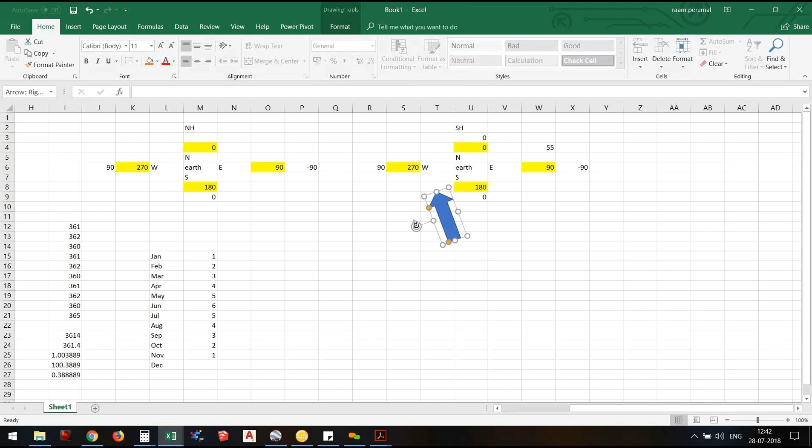This is perfect 0, right? Perfect north, and then it's facing like this. Let's say 10 degrees. So that has to be 10, right? So if it's facing something like this, 55 degrees, it has to be minus 55.

So since most of the projects that we deal with are in the northern hemisphere, this is a better thumb rule that we can use. Right. Okay.

Nothing much from my side. Any questions? Okay. Is Vignesh online? Yes, Raam. I'm online.

So you wanted me to show microinverters, right? You could see that I'm on the system definition stage, where we defined SMA inverters. Just like that, you use the drop-down box and define it. For microinverters we have to give an inverter section. Right? Inverter section, that's it.

So Enphase is one microinverter I know. I haven't come across anything else. I'm just going to Enphase, and then it gives me all the details here, right? So I just choose a model. Let's say I'm choosing this model.

So it depends, right? Sometimes one microinverter might take in two modules. Sometimes one microinverter might take in only one. So I'm assuming this one takes only one. So this number needs to be changed to 5112. And then it says modules in series is 1, number of strings is 5112. Then you use it. That's all you do.

And when you use microinverters, there is one parameter you need to get rid of. If it's a string inverter, you have different modules, so you have a mismatch loss. But with a microinverter, you don't have the mismatch loss. So you go into module quality mismatch and make it 0, because you're getting rid of that mismatch using the microinverter.

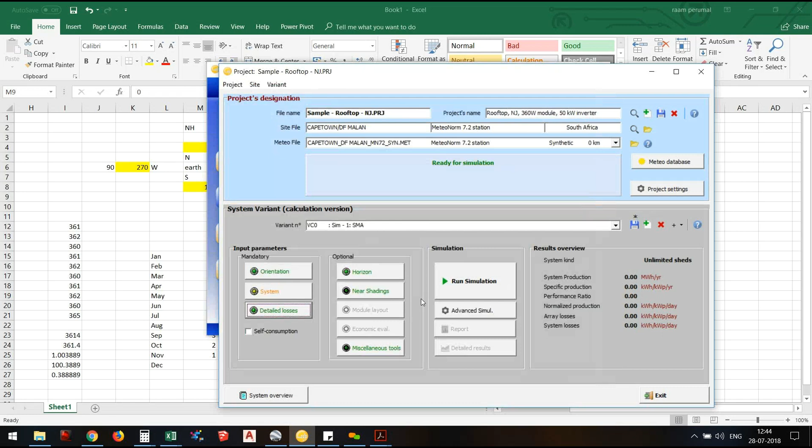And then there is another type of system which we do, which is SolarEdge. You might have come across it. What SolarEdge does is it has an optimizer for every single module. Let me choose a SolarEdge inverter. I'll just show you what happens.

So SolarEdge is a regular string inverter, but it combines the properties of a string inverter and a microinverter. You have an optimizer connected to every single module, and then you have an inverter. The wire goes from the module to the optimizer, and from the optimizer to the inverter.

So when you choose SolarEdge, you could see this section is a lot different than before. Now it has optimizer input, inverter input, and all those. Let me bring up a system that has a SolarEdge design.

These things like SLDs are done using HelioScope, right? Which one? The layouts? Yeah. No, I use Sundat. We at SunEdison initially developed a tool. It is a plugin for SketchUp, and I use that to generate layouts. Okay. HelioScope is also good, but sometimes

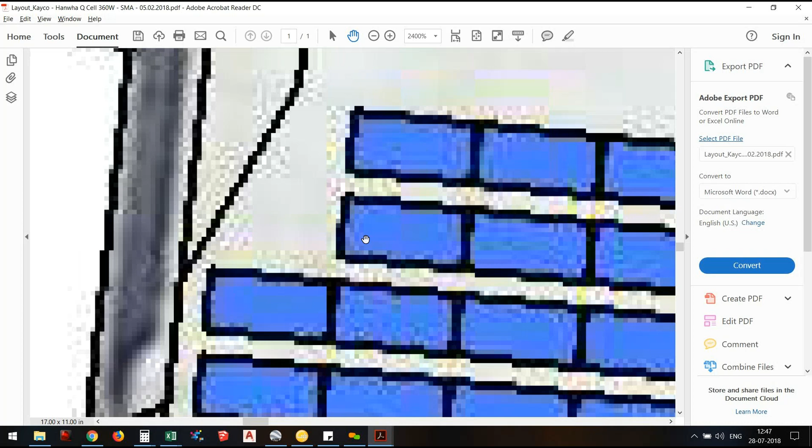Let's say this area is shaded, right? You see a black line here. It's because I've done the shading analysis here. But I'm like, okay, if there is a choice where I have to place either one module here or remove 17 modules, then I'll be like, it's okay. I'm just going to place one module, and I'm okay if it's also getting shaded.

But in Helioscope, I won't be able to place that module because the Helioscope algorithm thinks that this area is shaded, and I have asked Helioscope not to place any modules here. So it doesn't let me place a module here. So if I want to place a module here, I'm going to modify the shading loss. I go and remove the shading loss.

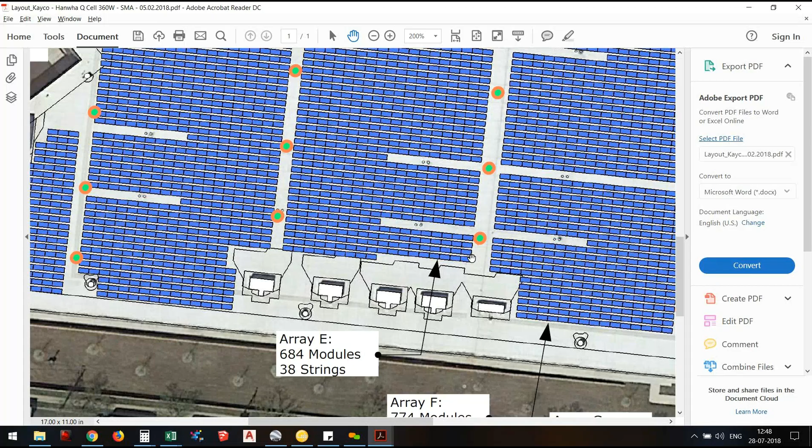What happens is, wherever there is shade, it removes that and places modules there. So it kind of doubles the work for me. So I kind of avoid Helioscope for now. But there are projects where Helioscope is easy. You just define it, and it goes and builds it very, very fast.

Okay. Can you tell me the name of the software once again? This one? Sundat. Yes, this is the name. SUNDAT. I'll forward the link also. When we were Sun Edison, there was a team that was developing the tool. Now this is part of Forefront Power, and they have a monthly license or annual license for the tool.

Okay. Trial versions are available, right? For this, we can use, right? For Sundat, they give you a trial of 10 days, I guess. But there are ways. If you want to use the tool for a little longer, you can just tell them you're looking at the tool, and if things work well, then you might go for a license. They might give you a longer trial period.

So they are still in the initial phase. They are trying to find users. They don't have as many users as Helioscope. Helioscope is widespread. Aurora Solar, you might have come across Aurora. That is also brilliant. They also have a very wide user base. But Sundat has a very limited user base. Only people who worked for Sun Edison, who have gone out of Sun Edison, are still trying to use that tool. So they still have a long way to go.

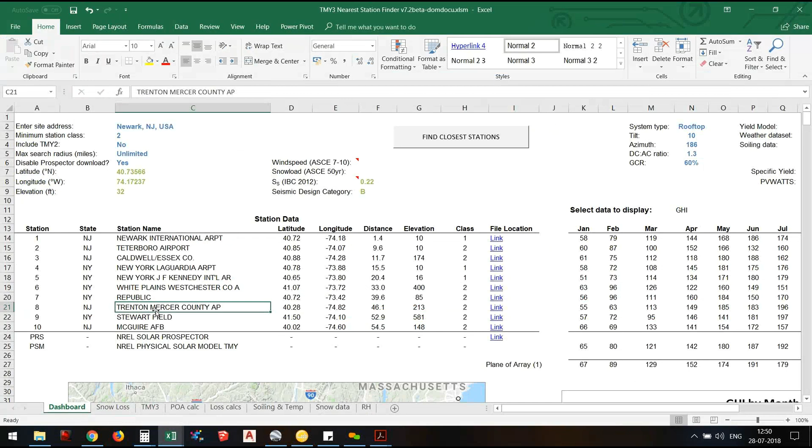Also, can you share that soiling loss sheet? Yeah. This is a proprietary Sun Edison sheet. Okay. No problem. I think for now we can live without it and learn PVsyst first, and then when we are okay with that, what I'll do is I'll try to find the scientific article based on which this spreadsheet is developed.

Yeah, I'll try to find that article and then forward it to you, because I'm still on a contract with Forefront Power. This tool was put together at Sun Edison, and it has moved to Forefront Power. So sharing this might violate their contract and I might get into trouble. Okay, no problem. I just want to know how they are calculating this. Yeah. It is not something that they have funded. It's just that they have put together the entire spreadsheet.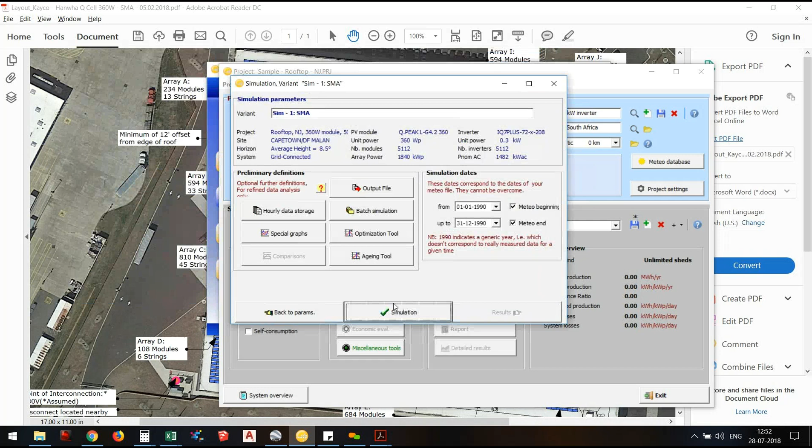You click on the output file and then you have a lot of details here. It says meteo data, collector data, everything. When you click on efficiency, it says efficiency of array, efficiency of inverter, something like that. And then you click on system, it says available energy at inverter output, AC ohmic losses, energy injected into the grid, all these values. So whatever values you want, you just click OK, and then run the simulation.

So what happens is, PVsyst will generate a spreadsheet for every single hour. Usually what we look at is the final report, right? It says this much energy is generated, this is the specific yield and everything. But for you guys to use, especially in monitoring, you generate a lot of reports based on that, right? So you definitely need 8760 data. That's what we're generating right now.

So with real-time data, how can we start here and fetch the estimation? What, Krishna? I lost you a little bit there. Yeah, just if you have real-time data, like last month or the month before. Okay, there are a couple of ways to do it. What I have done predominantly is when you have monthly data, you need two data. You need DHI and GHI, right? You want to say diffusion? You need diffusion and

No, you usually get direct normal. What are all the data you get from the pyranometer? I think you get GHI and direct normal, right? GHI and POA, plane of array. You get plane of array. Okay. No, plane of diffusion is not available. Yeah, we get only one feed, depending on which angle we install it at. So you get only plane of array, right? Plane of array. So usually with just plane of array it's a little bit difficult.

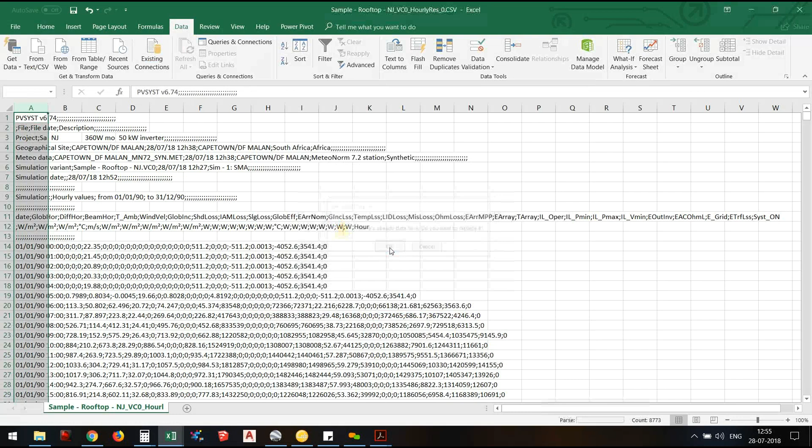And then I just compare the data from December. I take all the data from December and compare it with the site measurement. So I will click OK. I'll show you the sheet now. You see, we created a project now and tried to generate an 8760 file. So this is the spreadsheet. It has everything like this. Right, so this is the data that's generated.

You have global horizontal, diffuse horizontal, and this is for every single hour. Hour 1, hour 2, something like that. And then you have system file, E_grid and everything. So you see E_grid. This is all the energy that is being generated. And you're seeing some negative values here because it really depends on the inverter. Some inverters consume a little bit of energy. Inverters need some energy, right? They have hardware running, displays and everything.

So during the daytime, you don't see negative energy because solar is generating energy. It consumes a little bit for its own operation, very minute, but a little bit. But during night time, you don't have solar to balance that, so it takes from the grid. That is the negative energy you see in the 8760. But this is not the case with all inverters. There are some inverters which have night disconnect.

So at night when there is sunset, that's it, done. It will be sleeping. It wakes up only when there is sunlight again the next morning. So with night disconnect, you may not have this much loss. But there are some inverters which don't have it. Sorry to interrupt. Even in those cases, there will be some consumption, because it keeps checking the reference voltage from the grid line. Yeah, exactly.

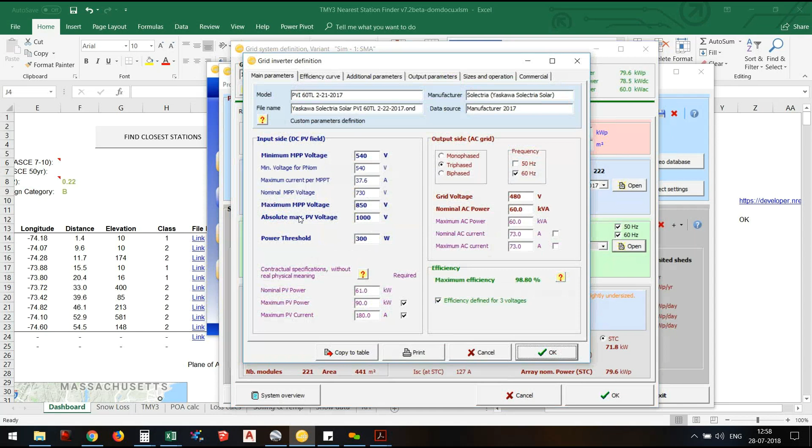Okay. So what happens is, if you want to define multiple MPPT, let's go with this. So I'm going to use a Solectria inverter. I'm just going to say 80 kilowatts here. This inverter actually has 2 MPPTs, I think so, I'm not sure. Okay, this inverter actually has 3 MPPTs.

So what I'm going to do is, I have 12 strings and I have 3 MPPT. So I would be feeding 4 strings to each and every MPPT. But let's assume I'm going to use this particular inverter for 2 different systems.

One half of the system has Hanwha 360 watt modules, and the other half has a different one. Let's say instead of 80 I have 55 kilowatts here. I'm going to use 2/3 of the system: 2 of the 3 MPPTs I'm going to use for Hanwha modules.

And for the next half, I'm going to use 1 MPPT, right? So I'm going to give 1 and then 4. So you can see that I have different string sizes. Here it is 2 MPPT, here only 1 MPPT. So overall the inverter is only one, but we have defined it for two different systems.

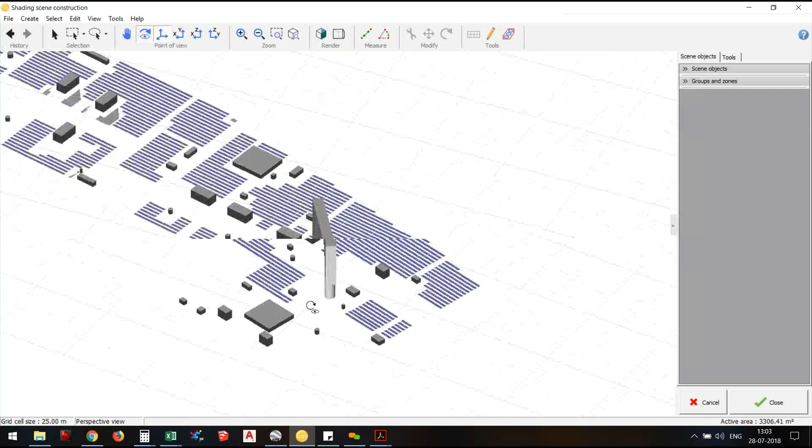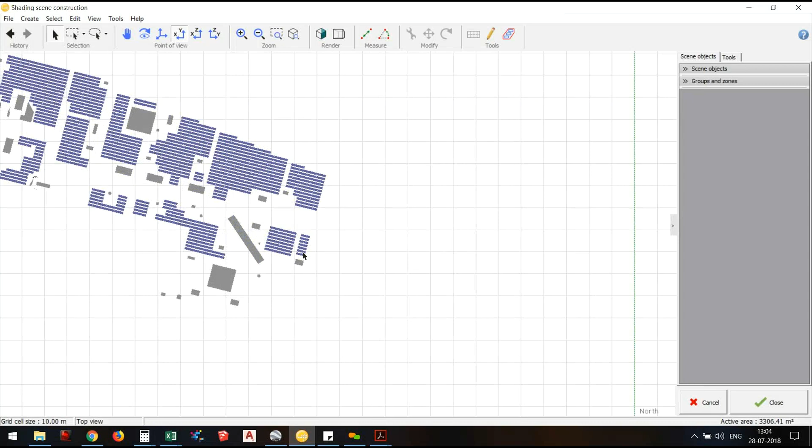So what happens is, in SketchUp, when you're drawing the system, we define a very regular azimuth, because SketchUp, AutoCAD, everything takes the real world as reference. North is always 0, south is always 180 degrees. But when we bring a project like that into PVsyst, it doesn't understand that it was generated in a different tool.

Something like this. Okay. So now when I see, these are all my modules and these are all the obstructions, and everything is obstruction except for the module. Everything else is going to cast a shadow, right? So what I'm going to do is I'm going to run the shading analysis now. I'm going to run the shading animation. You're going to see that.

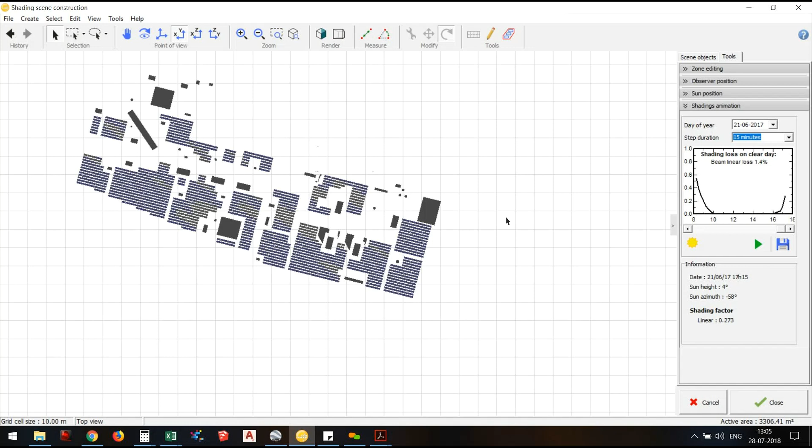On the right side, you can actually see that there is some shading from 8 o'clock to 10 o'clock, and then the shading again starts at 4 o'clock till evening. So you can see the module. This module, blue color, is not shaded, but this is all completely shaded. There is this huge unit which is casting shadow on all these modules here. Okay. This is on, say, June 21st.

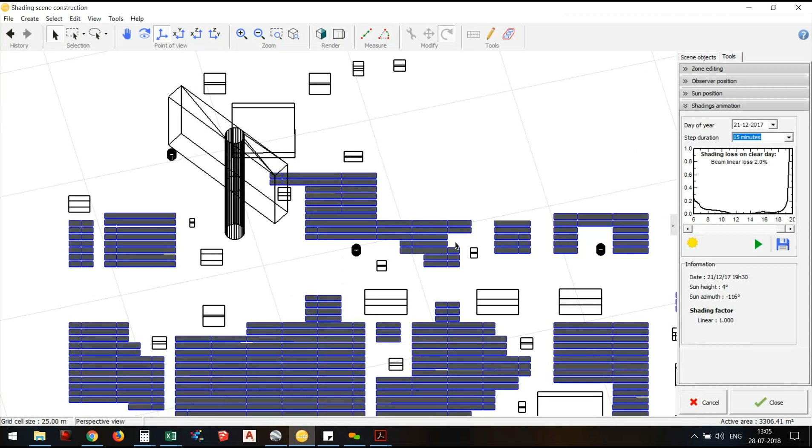I'm going to choose December 21st now. December 21st is the shortest day and you're going to have maximum shading. So I'm just going to run the simulation. You see how it simulates for every single hour, and then you have much more shading loss. I'm going to remove this. So if I remove this, I think you will be able to see the shading loss in a much better way. These are all the modules and these are all the shading. Yeah, it's clear.

Right? On the right side, you will see a graph. Okay. So this animation you can run for 1 day in a year and see what happens. But when you close this one and then, just checking the whole distance and everything, what happens is you can just create a table and then use it for the whole system. So, 1 second.

Okay. If you have an area, we can make this kind of SketchUp, right? Yeah. You can make a SketchUp. You can place all the modules and then bring that into PVsyst and run the analysis. Okay. If we give the switch and table numbers, will it automatically populate, or how is it in SketchUp? In SketchUp, it depends, dude. It depends on the tool that you use. So sometimes it's okay, sometimes it doesn't do that. So let me try this.

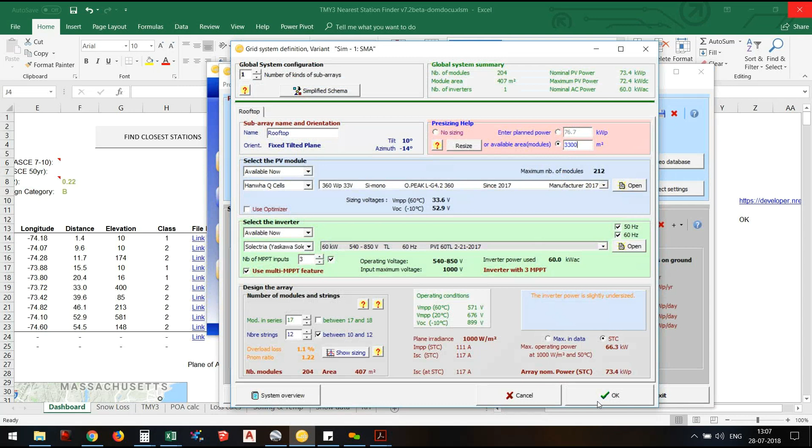So when I click on table, okay, so now we have the shading scene. I'm clicking on table. So table is when it calculates all the shading loss. It says, for example, height of the sun is 90 degrees. When height is 90 degrees, it means the sun is at the highest point. You won't see any shading, right? Whatever happens, at noon time the sun is going to be right on our head, right? But in the morning hours, you see some shading loss. So this table is created.

You close this one, and then when you run the simulation, it takes into account all the shading losses. So the final shading loss would be completely different from, you remember when we were defining tilt and azimuth, we were saying what is the interrow space and everything. You don't have to do any of that. If you are drawing a 3D scene, you don't have to do any of that. It picks up everything. It picks up module count, module size and everything, and then brings it to this page.

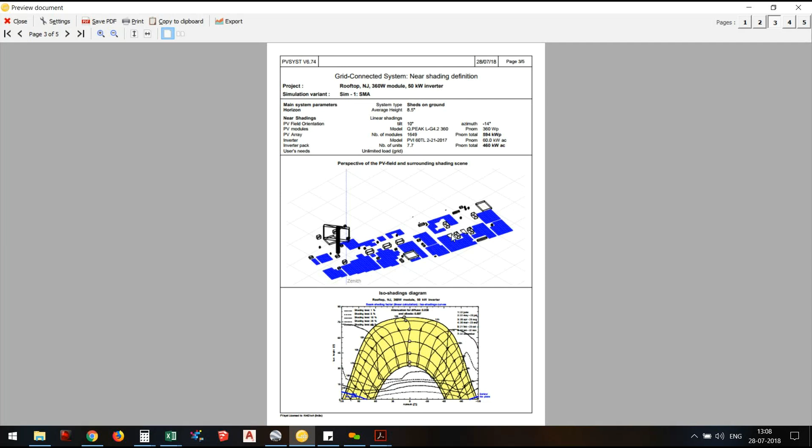Now you see there are two images. One is this. Yeah. Okay, and the other one is this. This is the drawing of our layout. See, this also comes in the report. Okay. So only if somebody is uploading this 3D diagram, it will come, right? Yeah, exactly. Only when you have a 3D diagram. But for a tracker system, you definitely need to do a 3D drawing. Okay. It doesn't have to be exact.

I mean, with the area, we need to place all the rows and modules, no? And we need to do it manually, right? Yeah, for trackers, you don't have a choice. You have to go and create it manually. So what I have been doing is I create one. For example, I'm using NEXTracker. Okay. The ground coverage ratio or the distance between two modules is always the same, right? Unless I change it for every project, for 50% GCR, 35% GCR, something like that. If I'm going to change the ground coverage ratio, I have to change it.

If I'm using the same one, what I do is, for example, I create a system size for 500 kilowatt. I know 500 kilowatt will have so many modules. So next time when I want a 2 megawatt system, I just copy that and paste it 4 times. So I get a 2 megawatt tracker. And then if it's 10 megawatt, I just copy it and paste it like 20 times. So I get a 10 megawatt tracker. So that's what I'm doing for trackers at the moment. Okay.

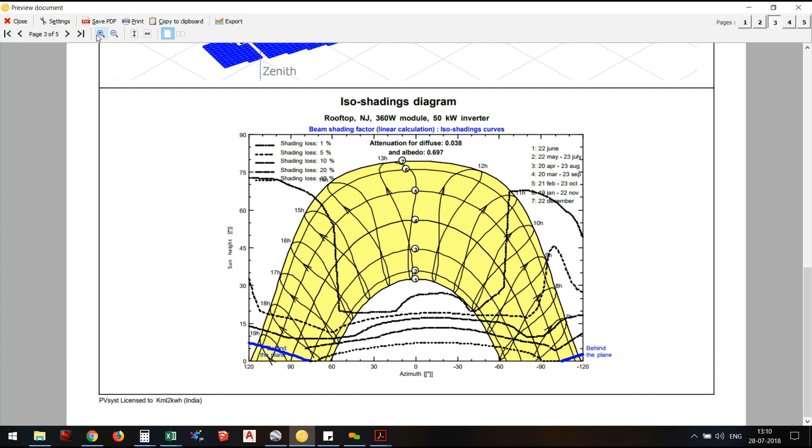So Sayan, you see this sheet here. We are not using horizon, but this sheet is actually for the shading loss. So what it means is, on the left side you would see something that says shading loss percentage: 1%, 5%, 10%, 20 and 40%. It all corresponds to these lines here. One is a dotted line, one is long dotted, one is a solid line, something like that.

So what it means is, during this time, the lowest line is 40% shading. So 40% shading means in December before 8 o'clock or something, it is always shaded. Shading is throughout the day. But we need to understand that

since it's the southern hemisphere, you would see the numbers going from right to left. Right side is morning, left side is evening. Because we defined Cape Town, right? We haven't changed from that. So the system still thinks that we are in Cape Town, and you can see it is going from here.

Dude, this shading analysis, you do it only for rooftop or for grid utility also? I do it for ground mount also, but it really depends. If there are a lot of trees and things like that, then I do shading analysis. But you need to manually give the rows. Those things you need to work out a lot, right? Yeah, I do that in the layout, and then I bring it in. Because let's say if it is 50 megawatt, then it is too huge, no? It will be huge. I won't be able to bring in a 50 megawatt system.

When I bring it in, PVsyst doesn't say what the limit is. But if you bring in a system that is 3 megawatt, it just completely freezes. It won't do any work for you. So what I do is, for example, if the system is like 100 megawatt, I bring in a megawatt of system inside, so it is more like representative. The system that we brought now is a 400 kilo system. It is fine. It doesn't have any problem.

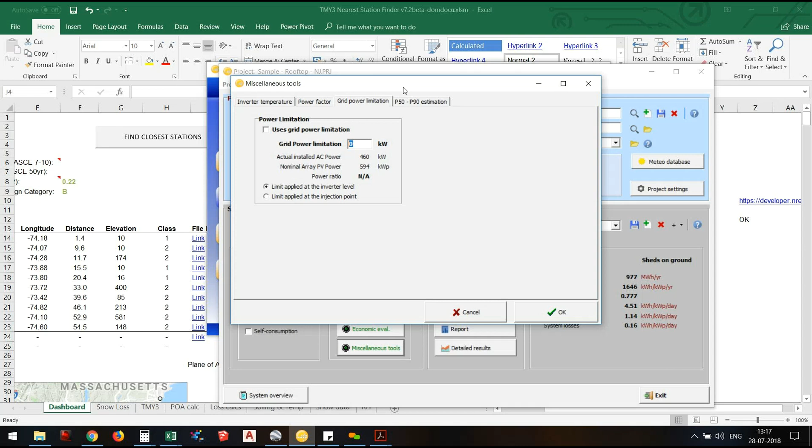What I'll do is I'll forward the recording we have for this session, and then I'll take in questions. Some might have thought this is a little bit fast. So maybe let's circle back again, get together, and try to answer all the questions anyone has. No, I think I lost you.